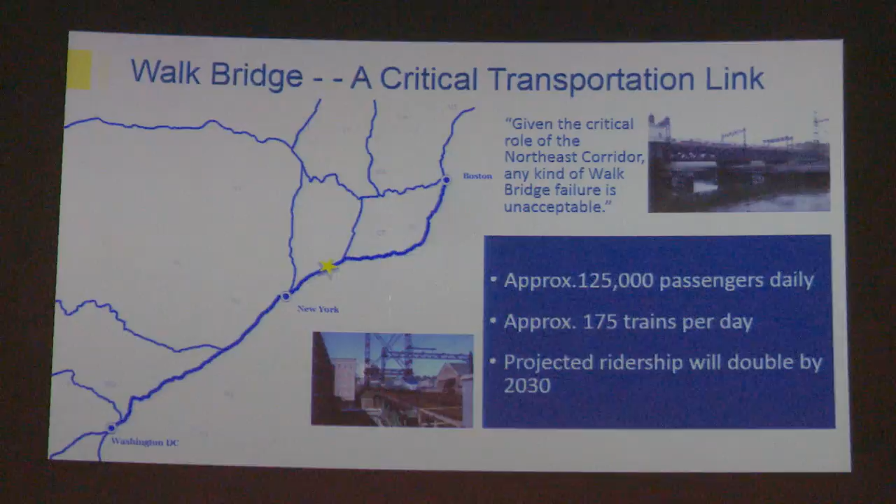So one thing we have to come across here for the project that we work with when we set up a project is purpose and need. People ask, what is purpose and need? Well, it is the criteria that we use that when we set up a project, it has to be met.

So what we decided on this job, in consultation with FTA, is that we're going to have a resilient bridge. We're going to replace the existing deteriorated bridge with a resilient structure. It has to be a safe and reliable structure, and we want a redundant structure.

So what do I mean by redundancy? What I mean is that it'll be a structure that has basically two separate structures, so one moves up and down independently of the other. Currently, right now, the existing swing bridge is a single swing - you lose all four tracks. So by redundancy, we'll be able to still move trains if we have an issue with one of the structures, and you can still move trains.

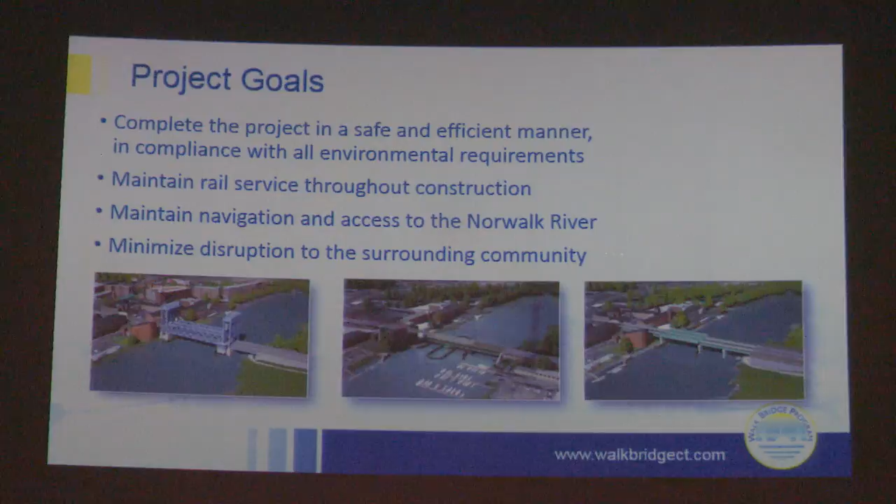Project goals. As we go through a project, you need to maintain project goals. We have a listing here: we want to build the project in a safe and efficient manner, in compliance with all environmental requirements set by the feds and the state. We want to continue rail service throughout construction, safe and maintainable. We want to maintain navigation and access to the river at all times. And we want to minimize disruption to the community, local streets, and businesses around the area.

Over the last two years, we put a lot of time into planning and engineering this project. I'll go through this briefly. We started with a conceptual engineering report back in mid-2014 into 2015. Then we did an operational analysis of the railroad to make sure we could keep trains and people moving along the line. We looked at a fixed bridge evaluation, then a raised grade evaluation if we were to raise the existing grade of the structure, and also a rehab of the structure. We looked at constructability evaluations, examining all the different aspects of construction on the community and the users.

We had an addendum to the conceptual engineering report, and then we finished up with our environmental documentation, which is ongoing—the current EA. We're going to have a comment period that goes out until December the 9th.

At this time, I'm going to turn the meeting over to Chris Brown, who's with HNTB, project manager, and he's going to explain more on what we looked at. Thanks, John.

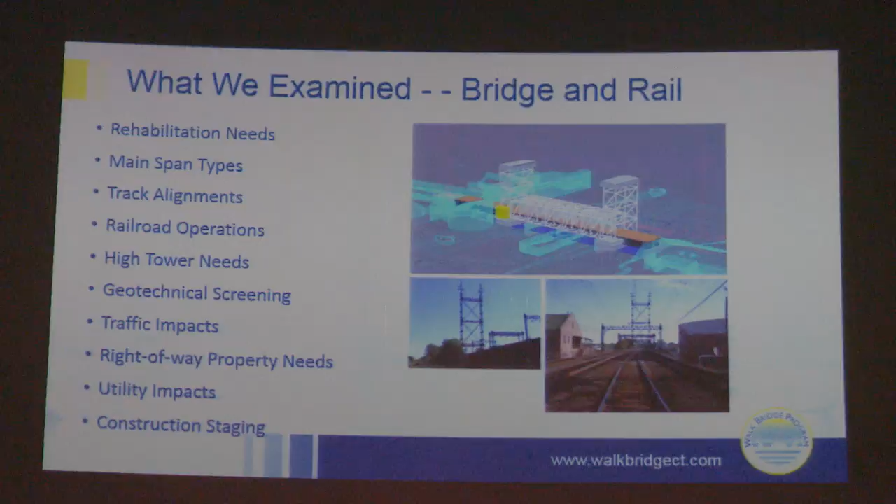So what we did was we first took a look at, well, we didn't want to take a look at any new alignments, right? Because that was really not feasible in our mind, was to build a new bridge, whether it be fixed or movable, on an alignment that was different from where the existing walk bridge was. So we were really confined to those areas of the existing bridge.

And that process was carried out with the other alternatives as well. So that span length was dictated going from A to D. And again, we're trying to miss, to the greatest extent possible, where those existing foundations were. We did evaluate alternatives where there was an existing foundation. It could be done. It's a very cumbersome task to remove entirely that existing substructure unit. These bridges are supported by timber piles that go down about 35 feet into the riverbed.

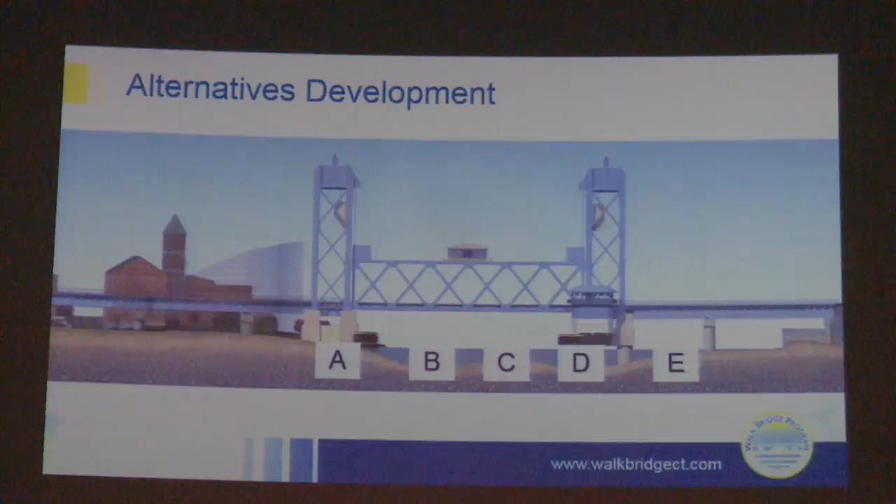And then also, lastly, here's another example again, going from A to D. So here we had a high-level fixed bridge going from A to D, and here we had a vertical lift span, again, same span length, but trying to miss those existing piers. So that was really the driver behind the types of spans that we looked at, the span lengths, and that then feeds into that overall construction sequencing that we talked about.

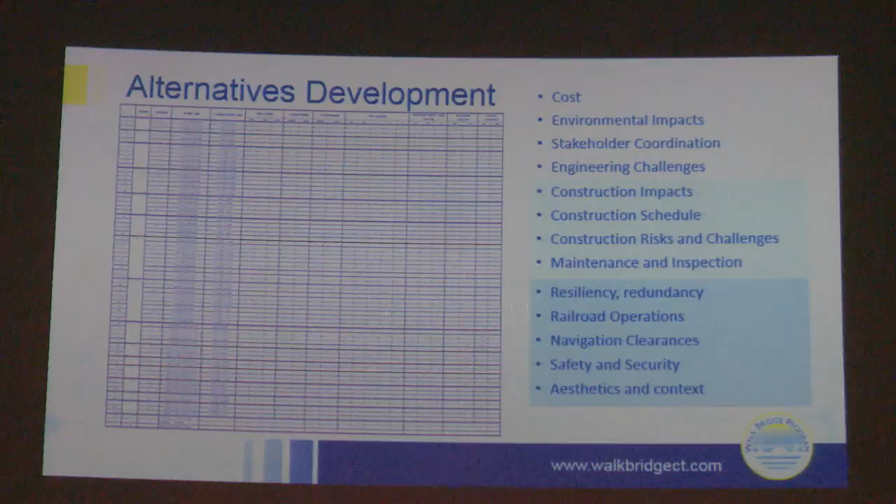And we'll talk about implementation here in a little bit. But all of those alternatives were really evaluated on a range of criteria, from cost to environmental impacts, construction impacts, meaning like what's happening at North Water Street, what's happening to the railroad, what's happening to the waterway users. And then in the end, we want to have that resilient and redundant structure. We want a structure that promotes enhanced railroad operations. We need to know what the navigation clearances are. And then also this is an opportunity perhaps to maybe bring some aesthetic enhancements to South Norwalk as well.

So in the end, some of you may have had an opportunity to review that environmental document and all of the alternatives that are in that environmental document, ranging from the do nothing alternative, which is the no build, ranging from the fixed bridge to the rehab to the movable spans. They're all in that original list of 70. And then as we got into the development further, we actually had subsets of different alternatives, like the fixed bridge had a couple of different subsets.

So all these alternatives, that original list of 70 as we call it, were part of that initial evaluation, and those were the ones that kind of rose to the top as best meeting the project goals, best meeting the purpose and need, and really being those that could feasibly be built.

So speaking of those alternatives, the no-build alternative establishes the baseline, right? We have an existing bridge out there. We understand its performance, its characteristics, its deficiencies, all of that. And then we go into those build alternatives.

Going back to that chart you saw on the previous page, which of course you couldn't read, but it's all in there. Those build alternatives include the rehab and then different replacement alternatives for fixed bridges, different arrangements for movable spans, and out of those assessments came a preferred alternative that we'll talk about here in a minute.

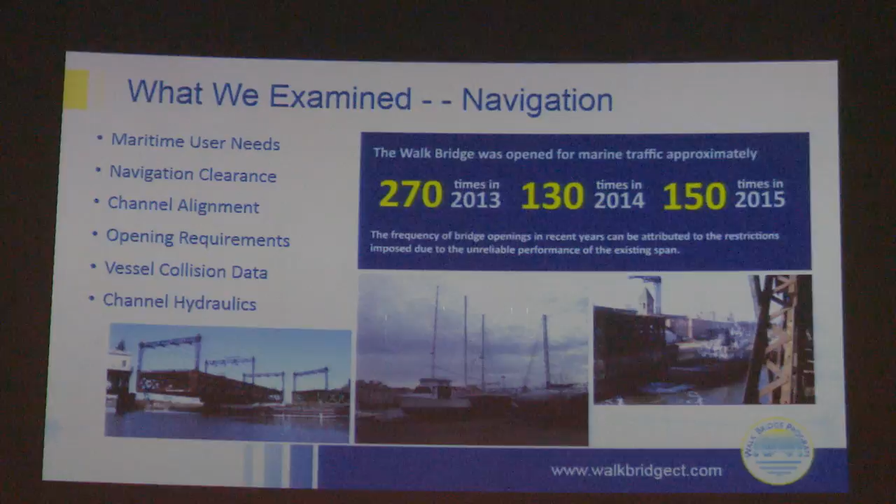A lot of times what we see on these old swing spans—keep in mind, at the turn of the last century, swing spans were the state of the art, okay? Different movable span types didn't really start to surface until you got into the 20th century. And a swing span at the time was great, an efficient structure.

The thing it also has is this big pier protection system that protrudes in and out from the structure itself, which a lot of times actually causes a bit of hindrance to navigation. And when you couple that with a structure in close proximity, it can sometimes make navigation along that waterway a little challenging at times. So we wanted to look at a way to investigate whether there was an opportunity to improve the channel navigation in this area as well.

Also, with barge traffic on the waterway, we needed to understand what type of vessels were out there, what type of tonnage those barges carry, and look at how to protect any substructure, whether the existing substructure or any new substructure, so that the integrity of the bridge remains intact should a vessel collision occur.

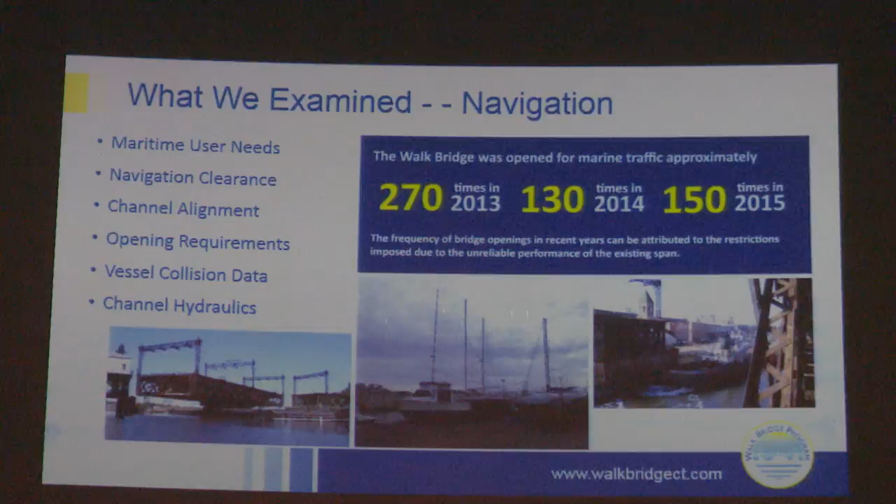And then we also need to understand what's happening with the waterway itself. So we do have an understanding of what's going on out there now because of the hydraulics on the channel. But if we change that configuration of the channel, introduce new piers, open up the channel, or constrict it further, we need to understand what is happening along the waterway. All that's investigated as part of a navigation study and our hydraulic analysis.

There's been a lot of focus, particularly in the environmental document, and rightly so, on the regulatory requirements that have to be met as it relates to the project, but really from an engineering perspective—I'm a bridge engineer, and I like to see these problems solved and figure out how to build these projects. And what it comes down to a lot of times in our decision making is how do you actually implement any improvements here?

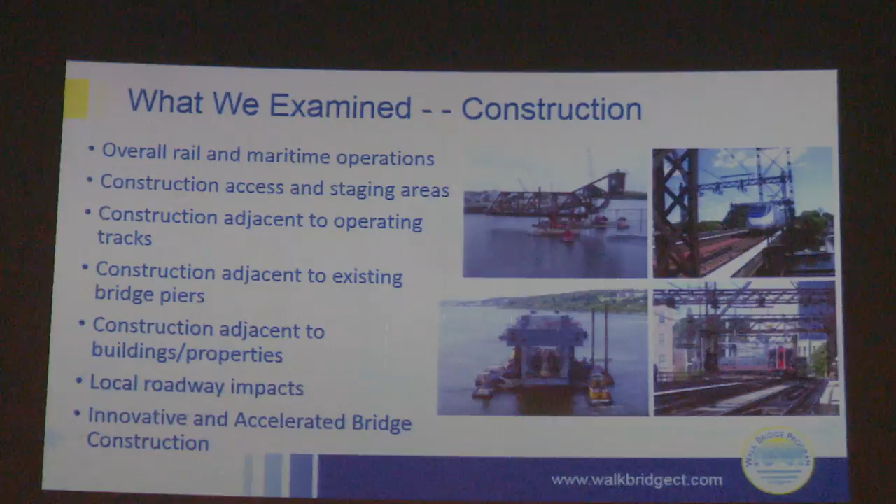Whether you're rehabbing the structure or putting in a new structure, you have to figure out how to keep trains moving, how to keep the waterway open, and how to limit impacts to adjacent properties and other community impacts. One way we do that is by utilizing what we call accelerated bridge techniques, or accelerated bridge construction, ABC. Those ABC techniques are really what's going to drive the schedule on anything done with Walk Bridge, because we understand schedule is a big concern to a lot of you. As John mentioned, we want to complete the improvements at Walk Bridge safely and efficiently, meaning doing it as quickly as we can without compromising or cutting corners. So those ABC techniques are really what's driving a lot of our decisions.

There are a number of construction constraints related to this project. This is probably one of the most congested sites that I've personally been involved with. There are adjacent properties on the west end of the project, and adjacent properties on the east end as well.

There are upwards of 200 trains a day that travel along this corridor, and the passenger trains on the New Haven line are all powered by overhead electrification. That's something that has to be taken into consideration when looking at how efficiently you can perform improvements at Walk Bridge. There are also Metro North and FRA, Federal Railroad Administration, operating rules that not only protect the traveling public and the local public, but also protect what they call the roadway workers—the construction workers who are on site operating equipment, working in close proximity to the existing tracks.

So all of those things come into play in terms of how efficiently and how quickly any of these improvements can be implemented. All of those constraints affect the safety, the risk, the cost, and the schedule of any improvements. Really, each of these alternatives is unique in that they all address those constraints in their own particular way. Some address those constraints better than others, and we'll talk about that.

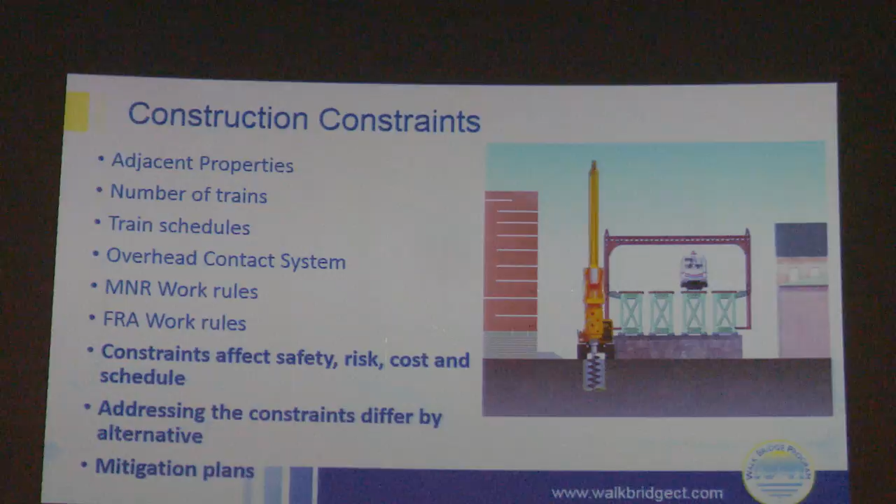For example, we've experienced this when taking geotechnical borings. We'll get a track at 1 a.m.—that's at least the time we're told we'll get the track. But because of train schedules and other constraints on the railroad, we may not be able to start our work until 2:30 in the morning, and then we have to get off the tracks by 4:30. So that work window, the time you have to do any operation close to your operating tracks, gets shrunk from, say, 8 hours to 2 hours. If you had an 8-hour operation planned and you're only down to 2 hours, that operation now takes 4 times longer. That's what we talk about as schedule risk and cost risk when working really close to the railroad.

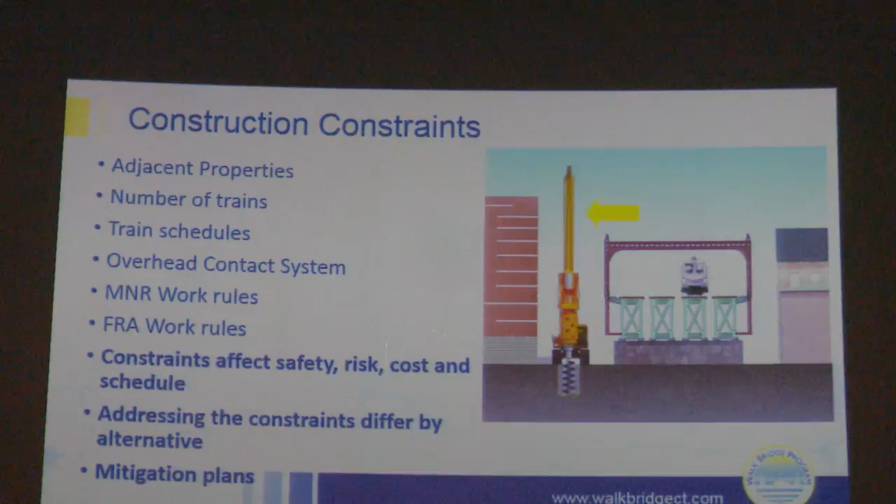Just moving away from the railroad, even 15 or 25 more feet, you can work almost free and clear—you're not bound by those FRA or Metro North rules, so that efficiency kicks up. When you look at some of these alternatives, for example some of the fixed bridge alternatives versus others that get further away from the operating railroad, that drives and improves the schedule. So that, again, is driving a lot of our decisions on the layouts and configurations of the different alternatives.

We talked about property needs that are needed in order to implement these improvements at Walk Bridge. It comes down to access. You have to be able to access the work that you're doing, and ideally, you can access that work where the activity is actually being performed. So if there's retaining wall work, you want to be able to get right up next to where you're working on the retaining walls. Obviously, work over the waterway will be done by a floating platform.

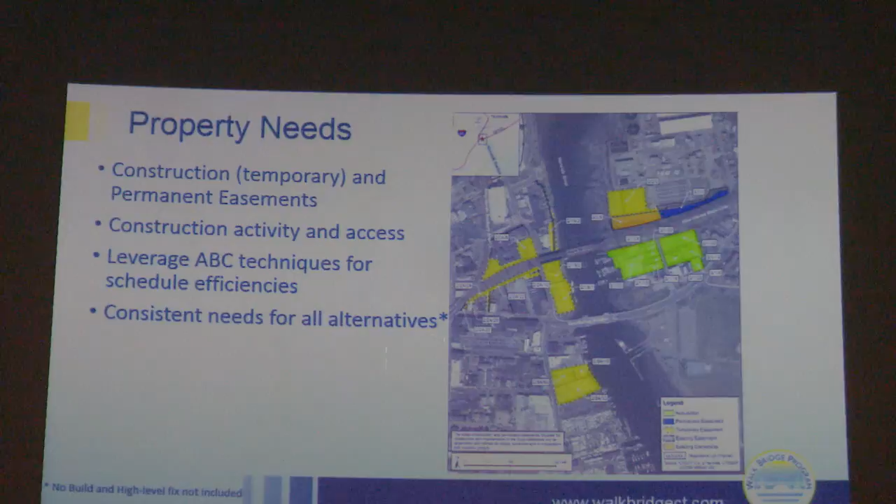Also, some of these property needs as part of the project are really there to leverage those ABC, accelerated bridge construction, techniques. We want to be able to pre-assemble as many things as possible close by to the bridge so that when it comes time to install those elements, they can be done in a swift and efficient manner, again compressing the schedule. So a lot of those property needs are there in order to leverage those ABC techniques.

The important thing to remember here is that whether it's an access constraint or a desire to implement ABC techniques, all of the property needs, rehab, fixed bridge, movable bridge, with the exception of the high-level fixed bridge, are consistent. Now, some of the property may be a little bit more congested during construction than others, just because of volume of materials, steel and concrete and reinforcing steel and all of that. But all of the property that's shown, you don't get a break, whether you're going with a low-level fixed bridge or a rolling bascule bridge.

The project limits between the movable and the fixed bridges, just like the actual temporary and permanent construction property needs, those project limits are the same, nearly the same, for all the alternatives as well. And I have to caveat this again: all of the needs from the project limits and the property needs are consistent for all the alternatives, with the exception of the no build, because if you don't build anything you don't need anything, or the high-level fixed bridge, which is in a completely different category in and of itself. But when you look at the other two fixed bridges and the movable spans, the project limits are nearly the same, as well as the rehab.

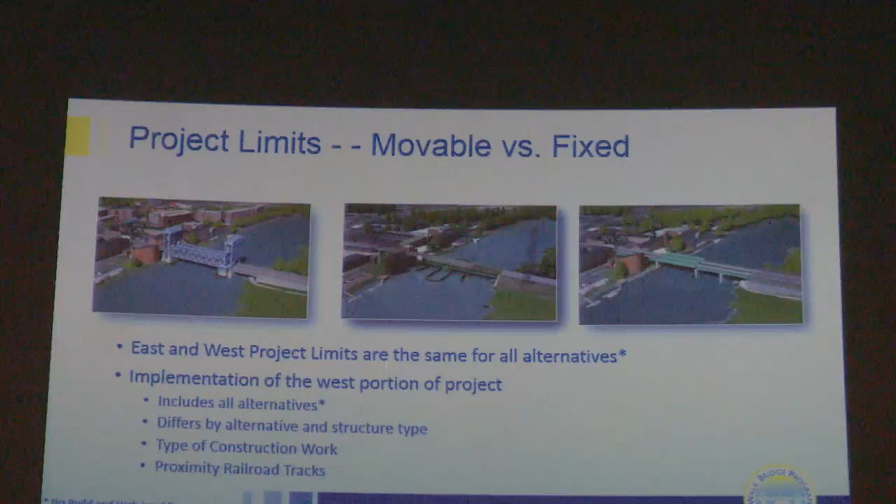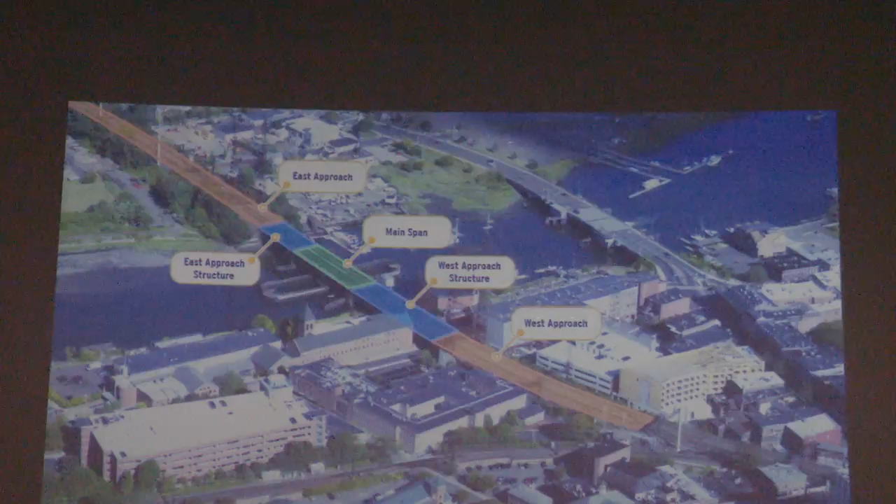So again, looking at an aerial here, some of you may have seen this before, but we've compartmentalized the project where we have work done on the east approaches, the east structure, the main span, the west approach structure, and then the west approach. For all the alternatives, we're doing work in all of those areas. If we're rehabbing the project, we're rehabbing the high towers on the east side. If we're replacing the bridge, we're still going to be doing work over North Water Street and on those west retaining walls. So again, there's really no difference in those alternatives on the west approach in particular and on the west approach structure. It's all a matter of how do you address it, how do you limit the impacts, and how do you implement those necessary improvements.

So let's talk a little bit about some regulatory aspects.

As it is right now, the Norwalk River is a navigable waterway, and the Coast Guard is involved. Some of you may ask, well, why is the Coast Guard involved? The Coast Guard, as part of Homeland Security, does many wonderful things - marine safety, law enforcement, and navigation. What they also do is administer bridges.

So bridges that cross a navigable waterway are administered by the Coast Guard. In terms of that bridge administration, they have to approve the locations and plans for any bridge that crosses a navigable waterway. There's a Coast Guard regulation on the existing span. They also regulate drawbridge operations, and their goal is to balance land and marine transportation needs.

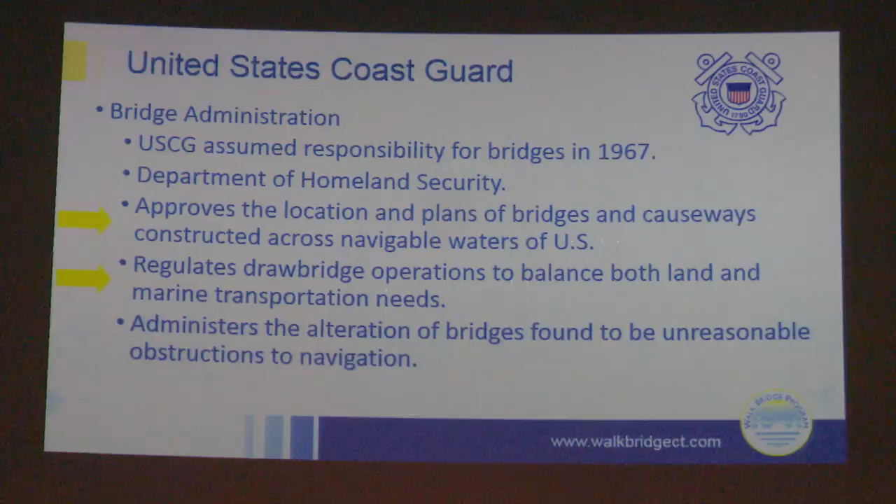One added thing that they do is tell an owner that if you have a bridge that unreasonably obstructs navigation, you have to remove it. Now, the good thing about that - that's part of the Truman-Hobbs Act - is that the Coast Guard will actually pay the owner to replace it, or a portion of it. But that's kind of how they view bridges - the Coast Guard views bridges as obstructions.

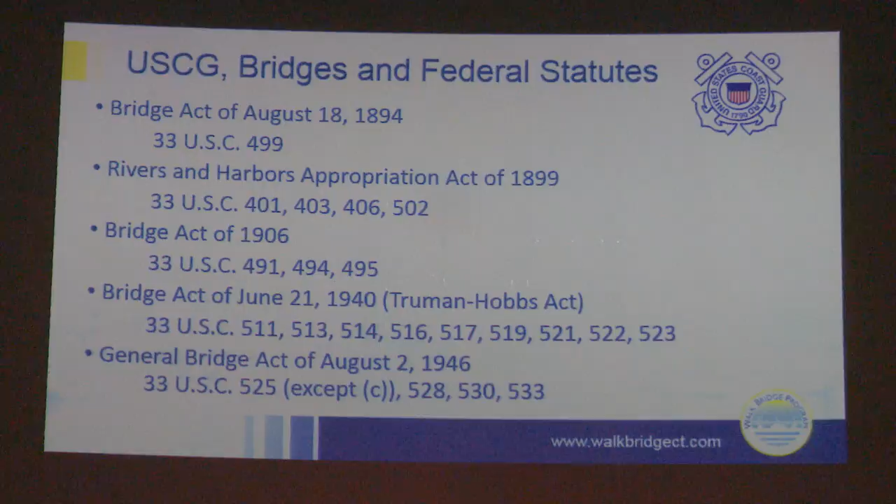I'm not going to get into all these federal regulations and statutes. I'm an engineer, and I've applied these in practice, but I'm not an attorney. There are a number of federal laws and regulations that the Coast Guard abides by in their operations.

So let's look at the Coast Guard mission statement. Really what they're aimed at as part of that bridge administration is to protect the freedom of navigation and the quality of the environment, and to ensure a balanced approach to land and marine transportation systems. They get it - they understand that we've got a roadway or a railroad that needs to get across a waterway, but we also may have vessels that use that waterway as well.

So how can we strike a balance between providing that surface transportation, in this case rail, and the waterway users? One way is to establish those navigation clearances. The Coast Guard does view bridges as obstructions to navigation, and they're permitted only as long as they serve the needs of land transportation while allowing for the reasonable needs of navigation. That's really the key here - the reasonable needs of navigation. There's no federal mandate that says you have to provide unlimited navigation.

If there weren't any overhead power lines right at Walk Bridge right now, that swing span, by how it operates, provides unlimited vertical clearance. So if you had a 203-foot tall vessel coming through here, they would only be bound by those overhead power lines. So it's not an absolute, but it's the reasonable needs of navigation.

What kind of navigation is out there today? What navigation has been out there in the past, may come back, or what type of navigation is going to be out there in the future? That's what they look at.

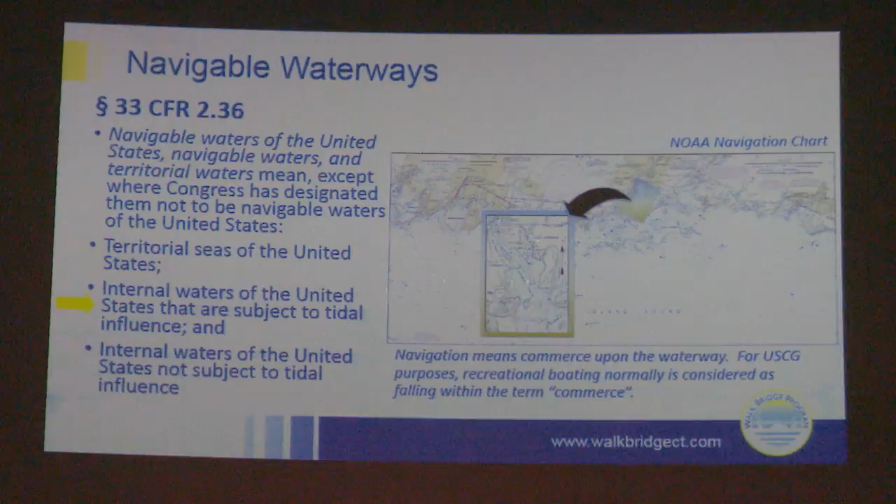So in looking at the definition of a navigable waterway at Walk Bridge itself, in the definition from the Code of Federal Regulations - that's what CFR is - they are internal waters of the U.S. that are subject to tidal influence. So that's what we have at the Norwalk River, and it's designated as a navigable waterway. The image over on the right is just a snapshot of the NOAA navigation chart that has the Norwalk River listed and lists the bridge clearances and everything like that.

So paramount to our alternatives development is to understand what navigation clearances are needed and what those reasonable needs of navigation are, so that when presented to the Coast Guard, they can make an educated decision. Now, that being said, they already kind of have an educated foundation of the type of navigation on the Norwalk River, the type of operation that the existing span has experienced as of late. So they already have an understanding.

But as part of our process, what we do is communicate with waterway users. We understand what type of vessels they have, what type of frequency they have, in order to establish what those reasonable navigation clearances are.

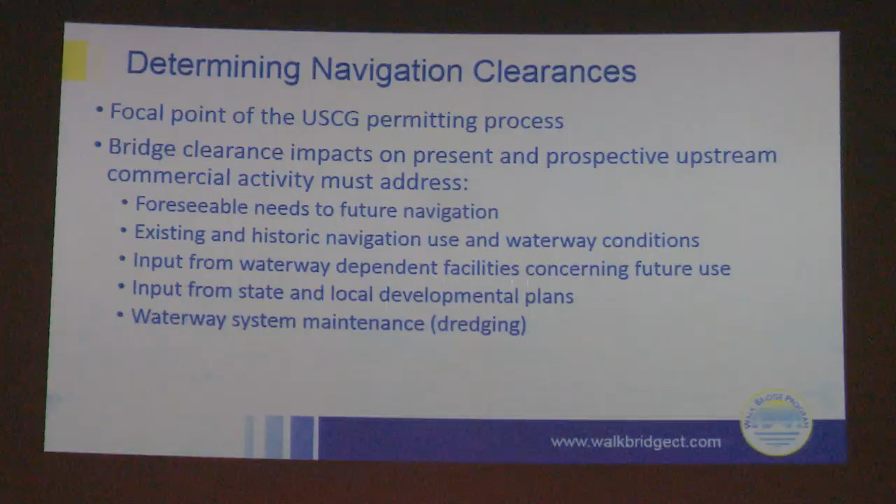So we're looking at what future navigation could be out there, that historic and existing navigation, talking to the waterway users, looking at what's going on as part of a federal navigation project, i.e. dredging, things of that nature.

So in answering some of the questions that do get asked by the Coast Guard of a bridge, when we go to submit a Coast Guard bridge permit application - by the way, we're kind of early on in this whole environmental process, we're just in the EIE phase. There's a whole permitting phase that happens after the fact. And the last permit that gets approved is the Coast Guard bridge permit, when you're looking to build a structure over a navigable waterway.

So we're going to have a lot of dialogue with a lot of different agencies - Fish and Wildlife, Connecticut DEP, Army Corps, etc. But at the end of the day, it's the Coast Guard that, before any shovel can go into the ground, has to issue a Coast Guard bridge permit.

So they want to know how that bridge is going to obstruct or not obstruct those reasonable needs of navigation. Does it impact present or potential commercial navigation? Does it impact dredging? Does it match the navigation clearances that may be on that waterway right now? The Coast Guard doesn't care about the overhead lines - I mean, they care about it, but the overhead lines get permitted separately, so there's a lot of clearance there now. They're focused on what piece of that bridge is going to be an obstruction potentially.

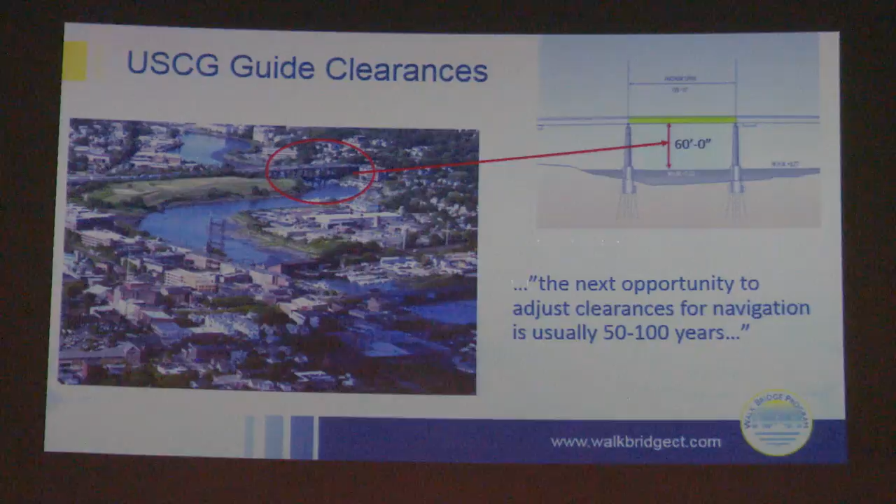So those are the federal requirements as it relates to a navigable waterway, but there's also state and local requirements that have to be met, particularly the Connecticut DEP and the Office of Long Island Sound Programs, in looking at the Connecticut Coastal Management Act. Our friends from the Norwalk Harbor Management Commission also have goals and plans for the waterway itself. So all of those federal requirements do kind of trickle down to the state and local level as well, all speaking to what type of navigation is needed, what type of navigation clearance that bridge has to accommodate. Can an existing movable span be converted to a fixed bridge, whether it be the existing structure or with the new structure?

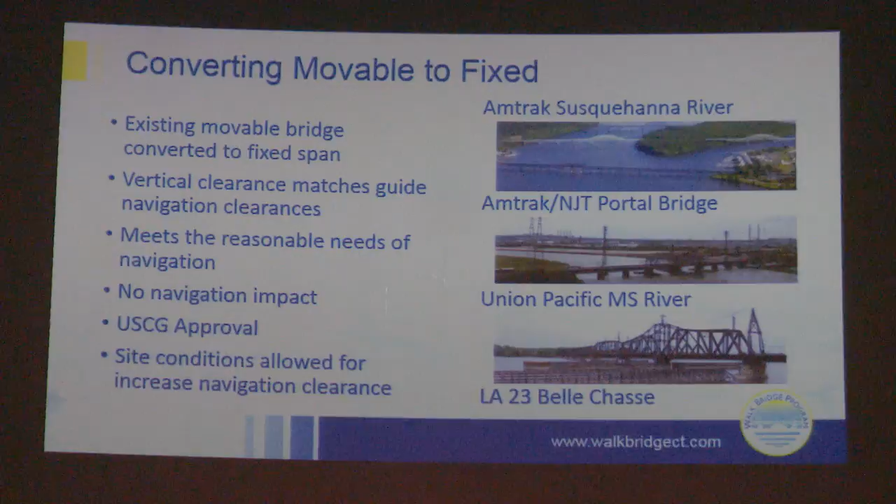That's down in southern Louisiana, that was impacted by a hurricane, but that was a movable span that was replaced or is scheduled to be replaced with a high-level fixed bridge. So it does happen, but at the root of this is that the navigation clearances presently accommodated by the existing span are met by that higher level fixed bridge.

So let's get into the alternatives here, again looking at the no-build and the build alternatives, and then we'll talk about the preferred alternative.

Since we have an existing swing span there, one departure from what we would typically do on a project like this is that we introduced two other types of fixed bridge alternatives into the discussion. We did that because we heard questions from all of you on why don't we do a low-level fixed bridge, or why don't we try to raise the grade of the existing tracks a little bit and still try to accommodate those waterway users. That we've done in the case of an existing movable bridge, and we'll talk about that here in a second.

But the low-level fixed bridge is a bit of a departure from what you'd typically see, where you have a navigable waterway that's active with recreation and commerce, and you put in a low-level fixed bridge. But we did that as part of our fixed bridge study, to address some of the questions the public did have.

So when you stack all those alternatives up against one another and look at the different project needs that were listed, whether it relates to reliability and resiliency, all the way down to sustainability, you'll see a lot of checks, which is good, and you'll see a lot of X's, which indicates that that particular need is not met by that alternative.

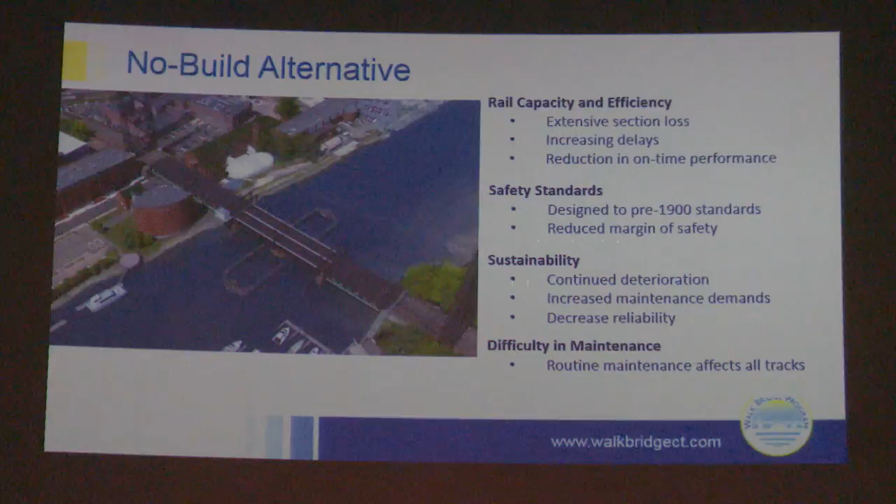So in looking at those deficiencies, we had to study those areas of deficiency and identify areas of improvement, whether it be strengthening different members or replacing different members, kind of breathing new life into that existing structure.

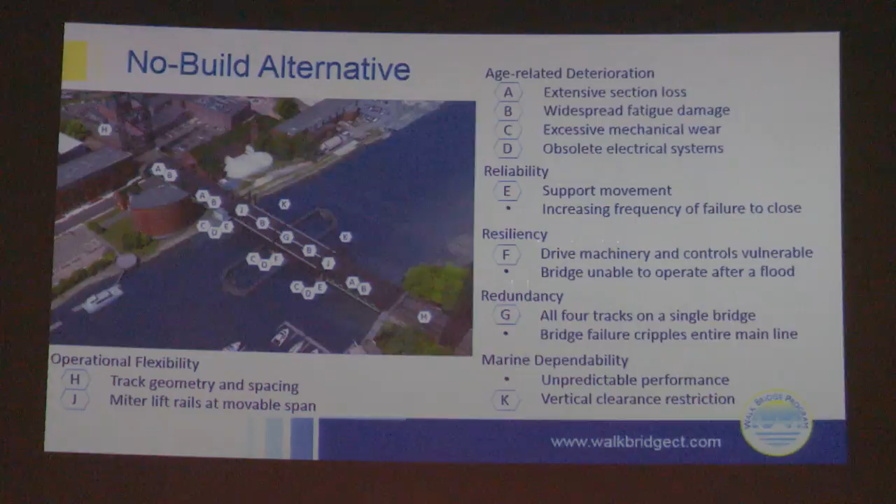So that's the no-build: if we just walked away from the bridge and said, all right, there it is, we'll deal with all those deficiencies and make maintenance repairs along the way. The rehab alternative is that no-build alternative morphing into something more, where we actually take those areas of deficiency and make improvements.

The thing to keep in mind on the rehab alternative is that, for all intents and purposes, you don't have a choice but to work in close proximity to the operating railroad. Because of the type of work that has to be done, your work windows shrink, and when you shrink your work window, you prolong the construction schedule. There's just no way around it.

In order to keep 150 trains going a day, you're going to be working in between trains, working at night, and that really draws out the schedule. And when you draw out the schedule, it draws out the cost of the project.

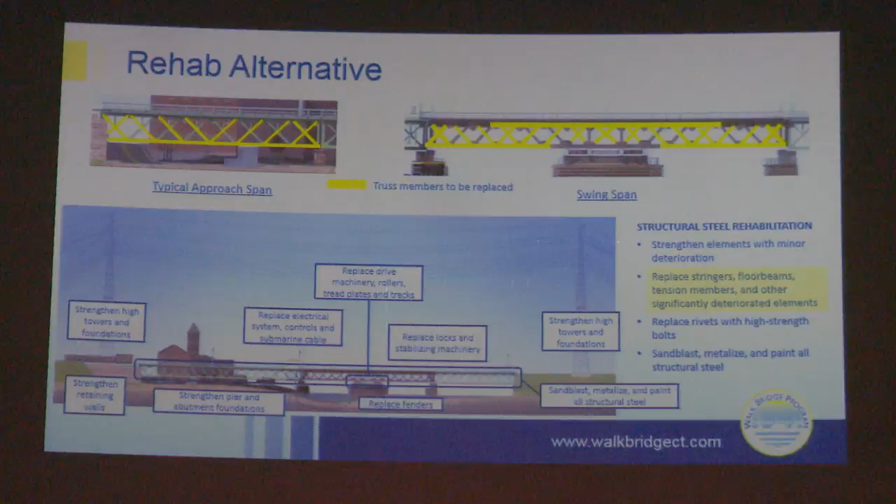Let's talk about redundancy and resiliency. Redundancy is really operational redundancy. The engineers back in the 1890s were pretty clever—they came up with this unique swing span, putting all 4 tracks on the same swing span, and everybody said, yes, engineering marvel. Well, 120 years later, when it comes time to address what's going on with that span, that's actually probably the biggest constraint we have on the project: the fact that that truss carries all 4 tracks.

It doesn't offer the redundancy we're looking for, so when maintenance has to happen—think about it like your car—whether it's a movable span or not, bridges need maintenance. They're exposed to the elements, exposed to wear and tear. There has to be routine, periodic maintenance. So we're not getting away from a maintenance-free bridge, but redundancy kicks in when you have to take tracks out of service to do that maintenance, and this structure doesn't have that redundancy to address those needs.

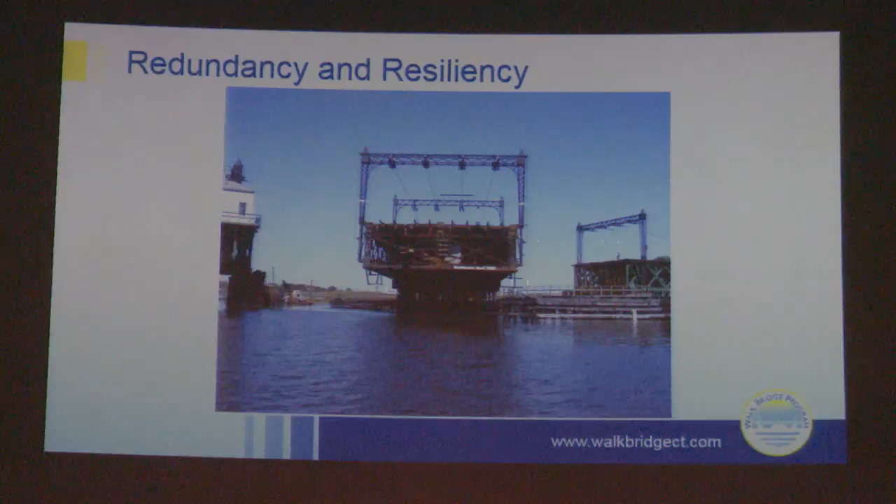So what happens then? Train delays, or a longer construction schedule. Crews are going to be out there longer because your ability to do the work is confined by the train schedule.

Resiliency is the ability to return the bridge to use, either partially or completely, in a relatively short period of time in the aftermath of a compromising event. That can mean nearly anything. It also refers to minimizing the vulnerability of critical elements of the bridge in order to facilitate its return to use.

So resiliency a lot of times comes down to, in this case in particular, storm surge and inundation. If we have an extreme storm event and there's a storm surge or a flood, we want to ensure that any alternative is resilient. There's also fracture and fatigue resistance, vessel collision, and seismic resistance. Overall integrity of the structure leads it to be resilient. So it's not just that inundation aspect of it.

The existing bridge itself has a design flood elevation of elevation 15. So we're kind of right on the cusp of getting those critical operating elements exposed to inundation from the federally mandated flood elevation, which is the 100-year flood plus 3 feet. It doesn't include storm surge, but it does include climate change effects.

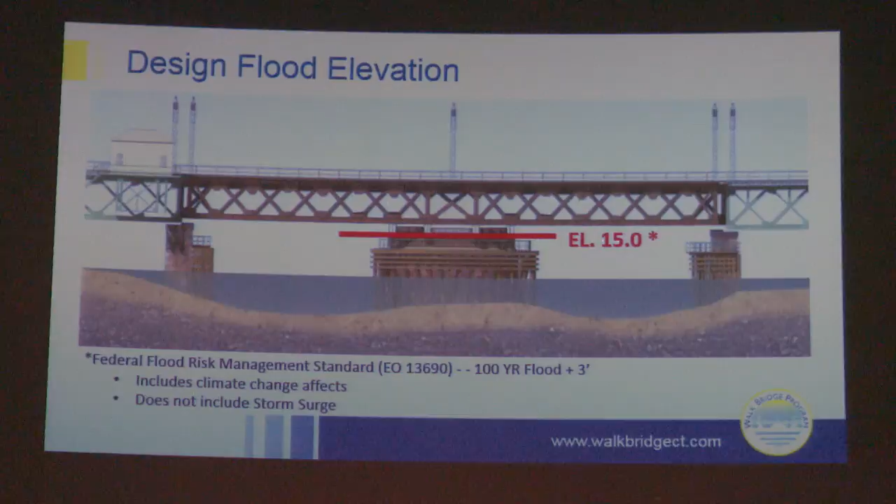When we talk about storm surge, that's if you had a hurricane event—that storm surge then goes up to elevation 24.4. Where does that number come from? Well, the National Oceanic and Atmospheric Administration, NOAA, has storm surge modeling for Long Island Sound already done. So we're able to communicate with them and know what that storm surge elevation is.

So from an inundation standpoint, we want to keep everything above that elevation. Unfortunately, the existing swing span doesn't accommodate that. Those elevations also do not include a parameter for sea level rise, so when you take that into consideration, that elevation has to kick up even higher.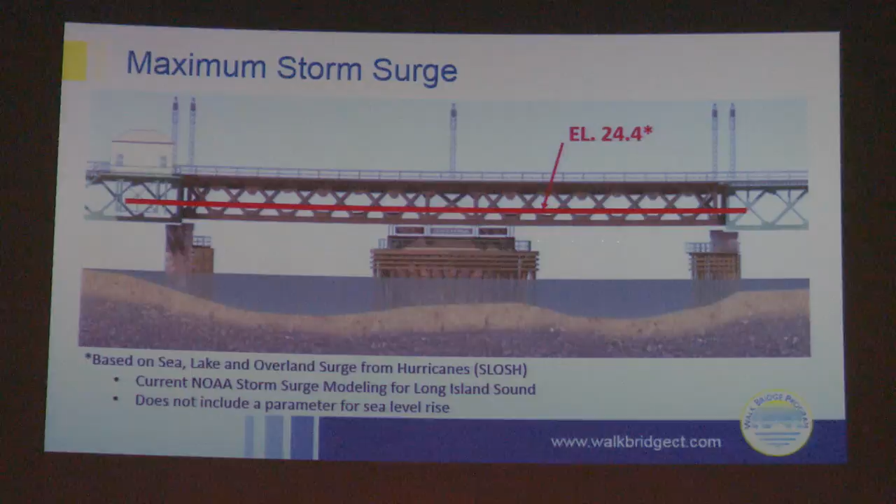So the rehab alternative has an accelerated rate of deterioration. One thing when we get into rehabs—and we do rehab bridges all the time—is that you can count on coming across something you didn't plan for. When we're relying on inspections and existing plan information, there's likely going to be something that doesn't look right or doesn't fit. That's one of those schedule risks we have.

There's the case here where we're going to be repairing stuff that's already been repaired once, maybe twice or more. The extent of the repairs, the high rate of deterioration, and all those repetitive cycles of maintenance really only make it possible to do a full system-wide rehabilitation. I know there's some question about why don't we just lock down the bridge and not make it movable anymore—but doing that doesn't address everything on the bridge that needs to be done. Quite frankly, the movable bridge aspects of this existing swing span make up a small fraction of the total cost of addressing all the needs on the project.

One of the things that's really tricky with an old railroad bridge is that you're mixing old infrastructure with modern needs. We can make improvements, strengthen the foundations, and do all that, but at the end of the day we still have this old bridge, and we're trying to run a modern rail system on top of it. The two don't always mesh well, because back when this bridge was designed, they didn't have catenary, continuously welded rail, and other rail features that we have today. So there's always not a good match when you have an old structure with modern rail systems.

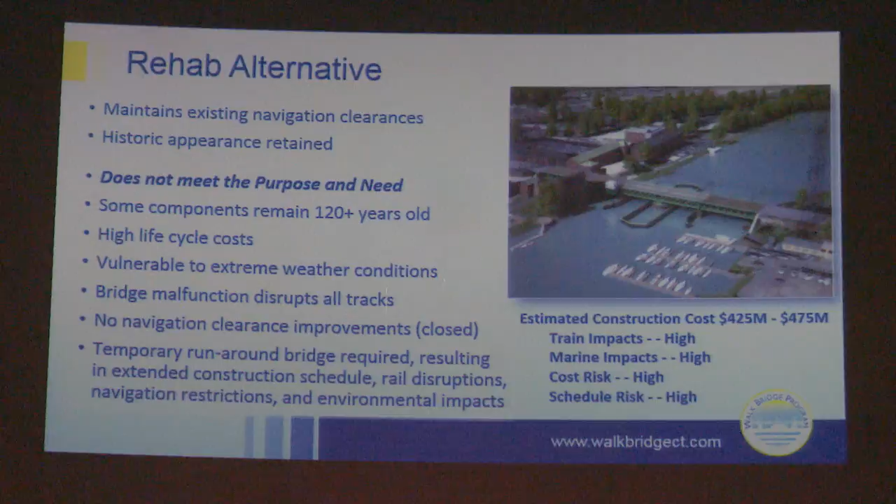So again, with the rehab option, you have a lot of train impacts, marine impacts, cost risk, and schedule risk. We'll talk about the runaround, because one of the ways we're looking at implementing rehabilitation efforts is to implement a runaround. Again, we want to try to get away from the operating tracks as much as we can, and one way to do that would be this runaround.

Now we're going to shift our perspective here and look to the southeast at the existing bridge. The runaround itself is a temporary fixed bridge that would be implemented, and it would peel off on the east side, cross the river, and then get tied into the existing bridge.

Now, that accommodates about 85% of the total bridge length, but because of our constraints based on the adjacent properties, we can't bypass the entire bridge. So we're left with the ability to clear the swing span and the east approaches, but we can't clear the west approaches. We can't clear what's happening at North Water Street. The runaround crosses over North Water Street, and there's actually a lot of prep time that takes place in order to actually implement this temporary bridge.

So we're building a bridge so that we can fix the existing bridge or to build some of the other alternatives. And again, the whole idea is to do it safely, to get away from the operating railroad as much as we can, and to do it in an efficient manner. What it does do is that it places this temporary structure in really close proximity to the aquarium. I mean, I'm talking literally inches away from the aquarium. That's how tight that is.

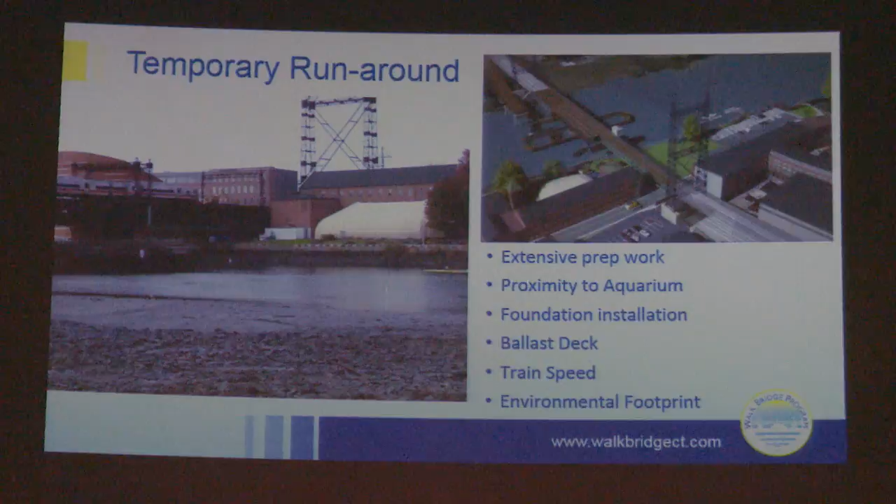The high-level fixed bridge, in looking at the existing swing span above mean high water, there's about 16 feet of clearance there over the waterway when the span's in the closed position. With the high-level fixed bridge, using the guide clearances provided by the Coast Guard for the I-95 bridge, results in a structure at 60 feet clearance. So that meets the reasonable needs of navigation.

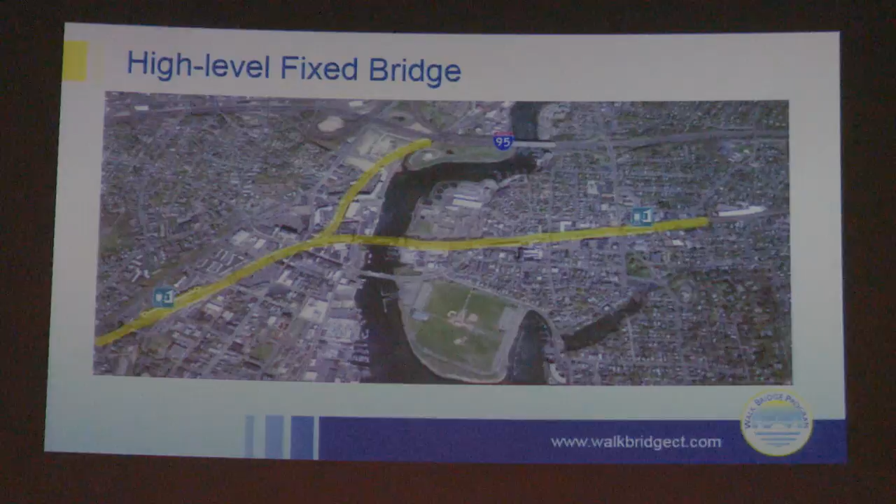That's great. What that also does is that it has dire impacts to the city of Norwalk for this particular alternative. And what I mean by that is that you basically have this large structure now passing right through East Norwalk and through South Norwalk. Those railroad grades are capped at the 1% grade that we see here on the image there. And the limits of the project, this is where we talk about the difference of the limits of the project, go all the way from East Norwalk Station, and because of those railroad grades, we can't get up and down fast enough to hit South Norwalk Station. So it would require a new South Norwalk Station.

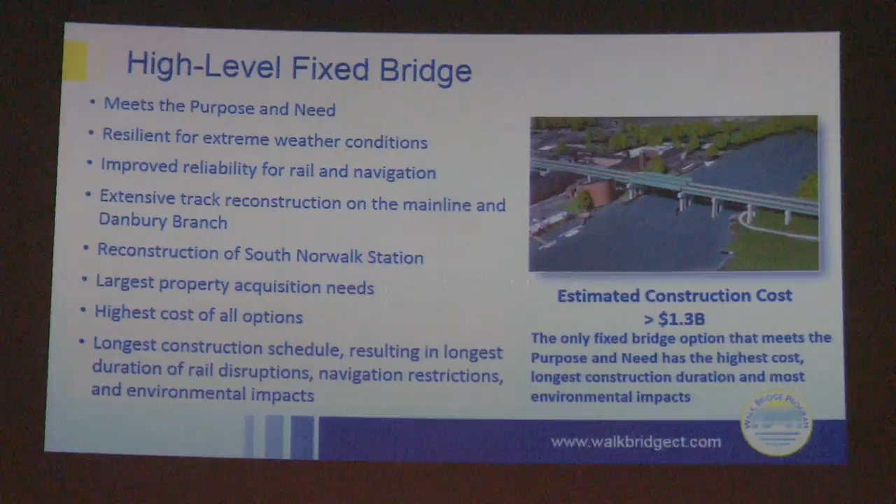It does meet that purpose and need, but it also is the most costly, and it's also the most environmentally impactful of all the alternatives.

So let's go on to those other fixed bridge alternatives. And again, these two alternatives were introduced by virtue of our communications and the comments that we've received from all of you. Why can't we have a low-level fixed bridge? So when you take a look at that low-level fixed bridge, the bridge is flat right now, pretty much across the existing structure, and the bridge is pretty happy without having any grade on the existing bridge itself. And again, it provides 16 feet of vertical clearance when the span is in the closed position.

With a different type of structure and with modern current day construction techniques, we can increase that navigation clearance with a fixed bridge to 20 feet. 20 feet does not meet the reasonable needs of navigation based on current waterway use. It doesn't meet reasonable needs of navigation based on historic and potentially future waterway use as well. But that's the regulatory side of it. Let's talk about the implementation side of it.

This is where, again, working close to the operating tracks, because again, we're building this bridge right in the footprint of the existing bridge, so we have to stage it right. And the way to stage it is potentially to incorporate that runaround structure. Well, if we had a runaround with this bridge, that'd be no big deal, right? Because we're already providing an obstruction with the finished bridge.

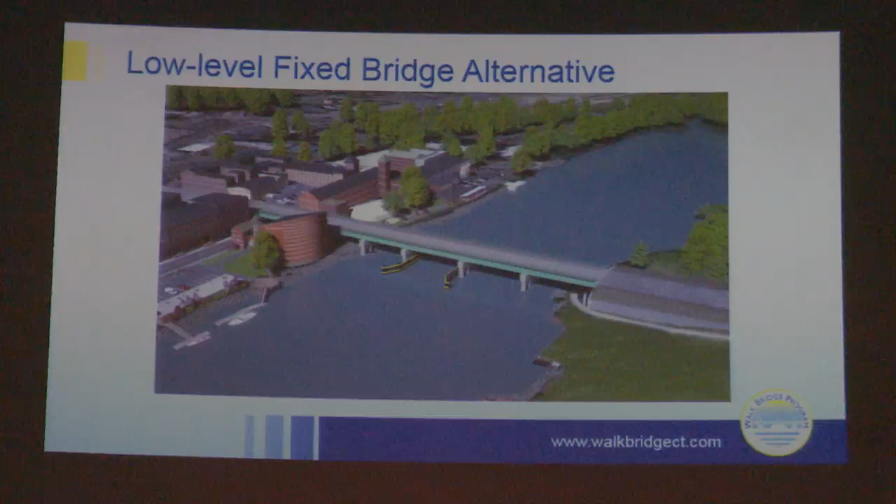So there's no big deal of having an obstruction with a runaround, however there are some constraints that come along with that. If you look at this bridge from a cost perspective, if we had a clean slate and said let's just cross the river without giving any consideration to regulatory requirements, then yeah, that low-level fixed bridge seems to be one of the ways to go. But you have to remember you have a bridge there now, you have to keep those trains going, and you're working in close proximity to the operating railroad, introducing a runaround which increases the environmental footprint over the others.

So with that, you have a resilient structure and improved reliability for rail traffic because of this brand new bridge. It doesn't meet navigation, the reasonable needs of navigation. You do have that temporary runaround structure to try to move construction along more efficiently. Because we're working in close proximity to the tracks, you've got high schedule risk and cost risk, and all the other impacts to the traveling public with the low-level fixed bridge alternative. When we look at costs, one thing to keep in mind is that it doesn't reflect those cost risks, so cost uncertainty is a big thing.

As engineers, when we look at cost, we take a certain amount of concrete, a certain amount of steel, and we know the unit prices of each of those elements, and we develop the cost. But what it doesn't do is account for what happens when we have a work window that shrinks from 8 hours to an hour and a half. What does that do to the cost? That drives up the cost.

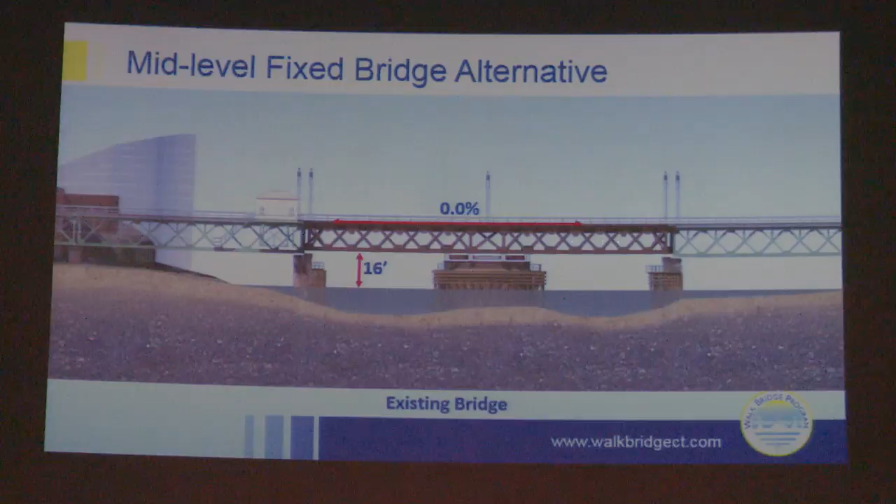So, mid-level fixed bridge then. We're getting pretty close to the end here, folks. The mid-level fixed bridge actually was a byproduct of what we looked at on a movable span option. What we did at Niantic, up the road a ways, on the Niantic River Bridge, was develop a grade raise on the movable span. So there's still a movable span with the new bridge at Niantic, but that was built on an entirely new alignment. We had the real estate to accommodate that, and we could increase the grade at that particular bridge.

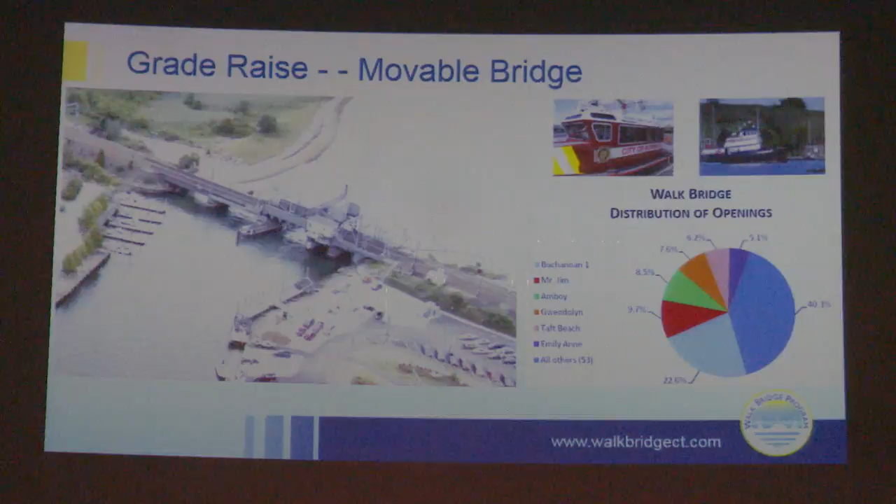But what we did do is take a look at the snapshot of navigation use available to us, and we looked at what happens if we were able to accommodate the barge traffic. By doing that, there may be an opportunity to eliminate a number of the openings on a movable span. That then turned into, well, let's turn that grade raise into the mid-level fixed bridge. So we're going to nominally increase the track elevation upwards so that we can try to increase the bottom chord of the bridge itself, and that distance from waterline to low chord would go up.

So with that, we could have a structure that has upwards of 34 feet of clearance. We're going from 16 feet to 34 feet. But the thing to remember here is that this waterway is subject to tidal influx, and there's a big swing between the water elevations, so there's no guarantee that those commercial vessels could be accommodated. They wouldn't necessarily have free reign on that waterway. So the fixed bridge alternative also has some constraints, just as the other alternatives do that we talked about.

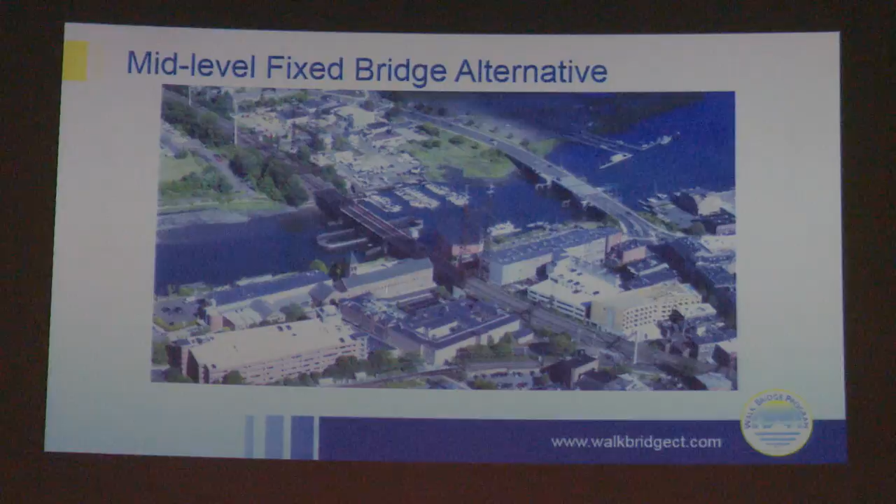But if we take a look at the image here, on the east side of the project we're going to be slowly going up as we approach the waterway, and the same thing on the west side of the project. We're going to increase the grade at 1%, because that's really the maximum we could do. If you stand on the walk bridge and look down towards the west, you can see a maze of overhead catenary and the rail systems and the structure itself, and it's a really complex endeavor to try to improve that track profile.

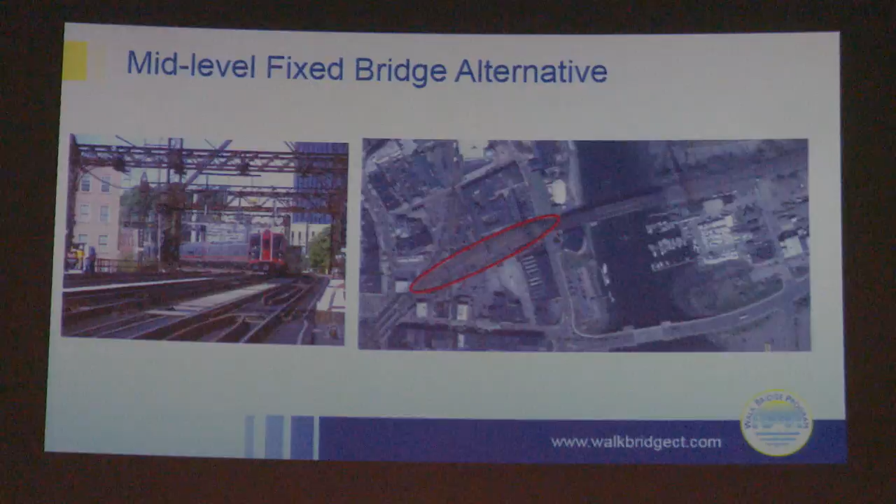The key challenge here is in the area on the west side, where we're really shoehorned in between the Ironworks building and the lock building, and how do you increase that grade raise? So for the mid-level fixed bridge, if you stood in the parking garage at Ironworks and looked at that high tower, you're looking at about a 6-foot increase, and then it tapers down before it gets to the Danbury line.

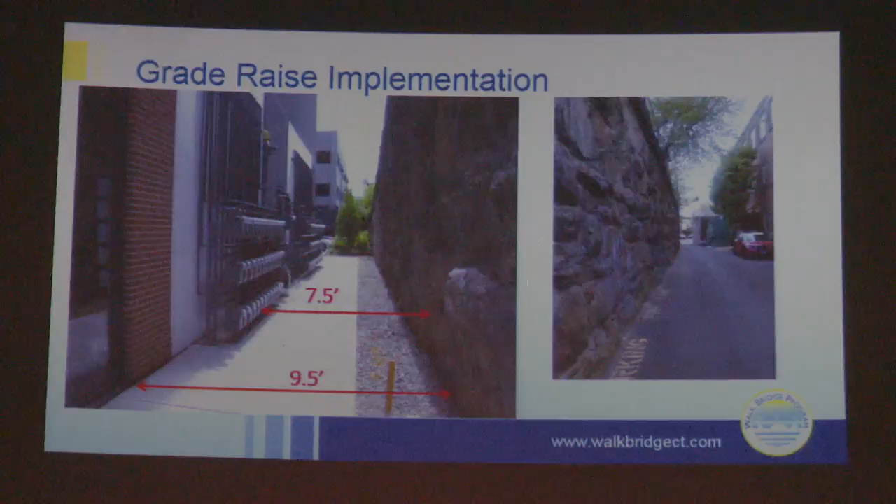Looking down the alleyway between the walls and the ironworks, it's very tight — there's not a lot of room to operate. On the right-hand side of the slide, you see the alleyway between the lock building and the retaining walls. Again, there's really tight confinement in that area.

What we want to do is increase the grade by that 6 feet. At that location, you're going to be 6 feet taller than you are today. It doesn't sound like much — it's a little shorter than I am — but when you're talking about increasing the track profile that much, it's pretty significant, and it represents a lot of challenges.

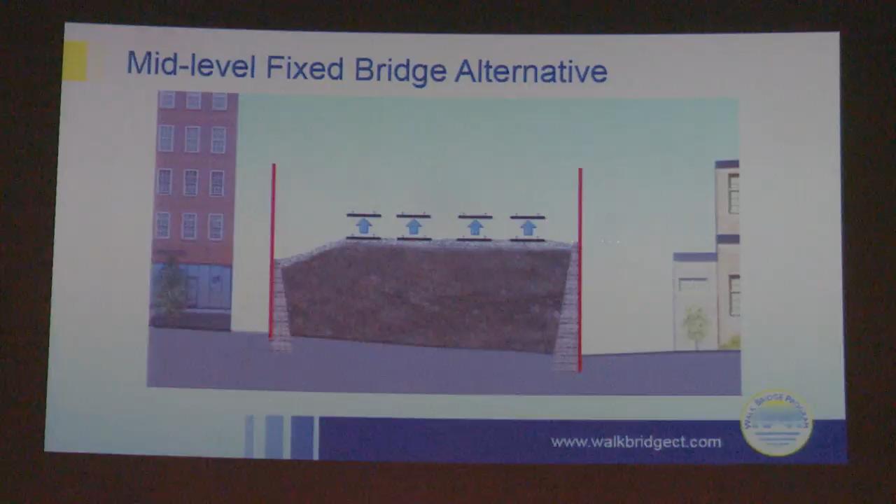We want to keep all of the work within the existing right-of-way — the permanent construction within the existing right-of-way, represented by those red lines. We've looked at and studied this a lot, I can tell you that.

One alternative would be to add more height to the existing walls. But those walls are very challenging — they have a lot of unknown conditions, and adding any new height or load to them would be a challenge. We looked at building a bridge, and even walls within the walls, to try to retain this extra 6 feet we're trying to accommodate.

Really, what ruled this out — in fact we have an entire 30% design of this done — is that it has a fatal flaw. When you get to this condition, imagine you're looking at the 2 tracks on the left; those are under construction right now because we're working to raise that grade 6 feet, while we're operating on the tracks to the right.

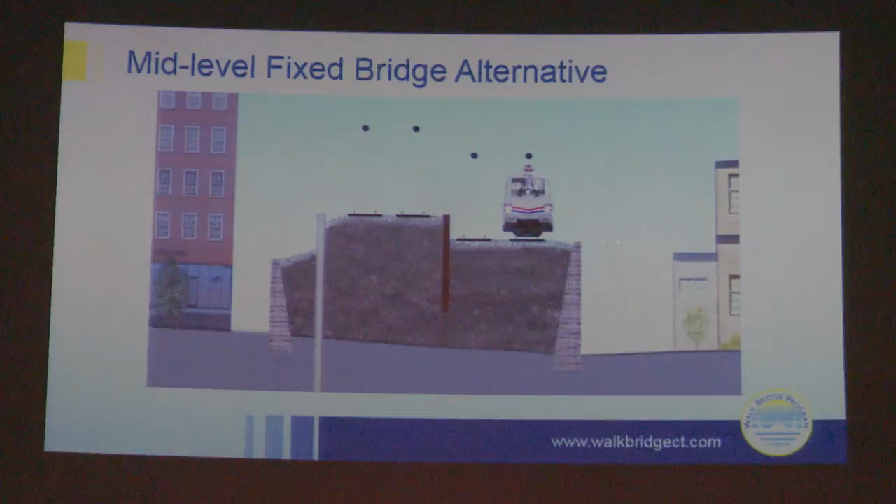At this location, you can only operate 1 track. So like that runaround bridge had 2 tracks and we were trying to get 150 trains a day on 2 tracks, now we're trying to get 150 trains a day on 1 track — a lot of schedule impacts on the commuters with that operation. So really, the mid-level fixed bridge, while attractive in terms of accommodating navigation, its challenges in implementing really kind of ruled it out.

I'm going to skip this slide because it's hard to tell what's going on there. So again, the mid-level fixed bridge where we raise the grade doesn't meet the reasonable needs of navigation because there are vessels that cannot pass beneath 34 feet. We would implement that temporary runaround, and the grade raise on the west approach is really challenging, with a lot of risk associated with cost and schedule because you're doing all that work right at North Water Street to try to raise that grade.

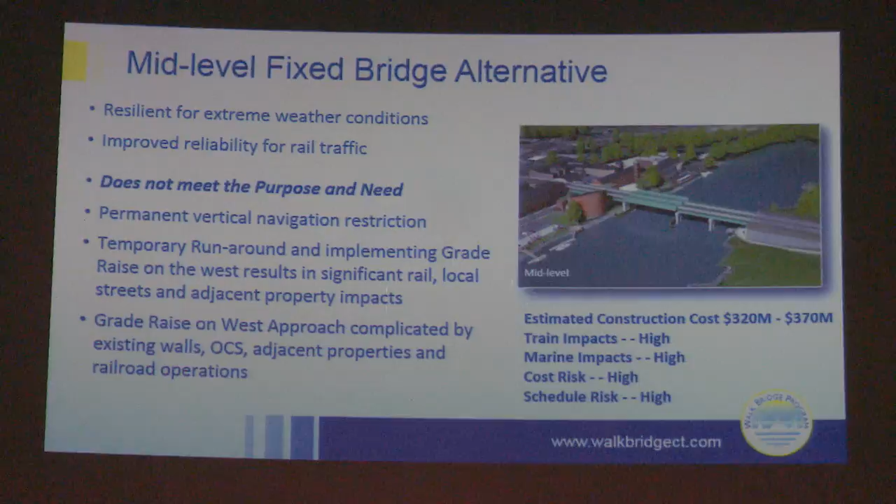So now we move on to the movable bridge alternatives. Of that list of 70 bridges we saw, probably 60 or so of those alternatives were different movable bridge types, whether they be bascule bridges or vertical lift bridges.

The movable bridge alternatives were the lowest cost to satisfy the purpose and need. If you remember, the only other alternative that met the purpose and need by the definition of the project was the high-level fixed bridge, and that was the alternative with the highest cost.

The movable bridge alternative would be resilient to extreme weather conditions because we would place all of the equipment where it wouldn't be subject to inundation. It would be resilient to seismic activity, long-term fatigue, and vessel collision. There's also the fewest foundations in the river itself.

It has the potential for the shortest construction schedule, and the shortest duration of when we'd have to go down to 2 tracks, which is also attractive. We don't have to have the temporary runaround here, because the way we're configuring the structure type and the foundations gives us the ability to get far away from the operating railroad to make construction really efficient.

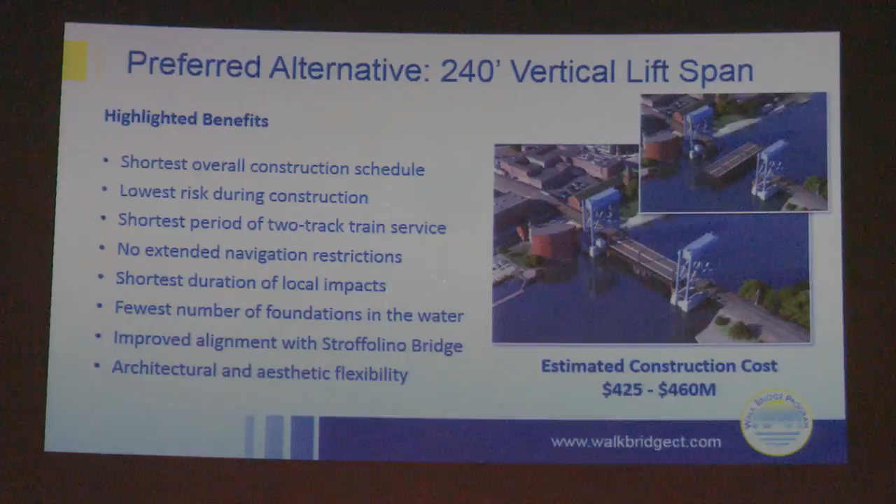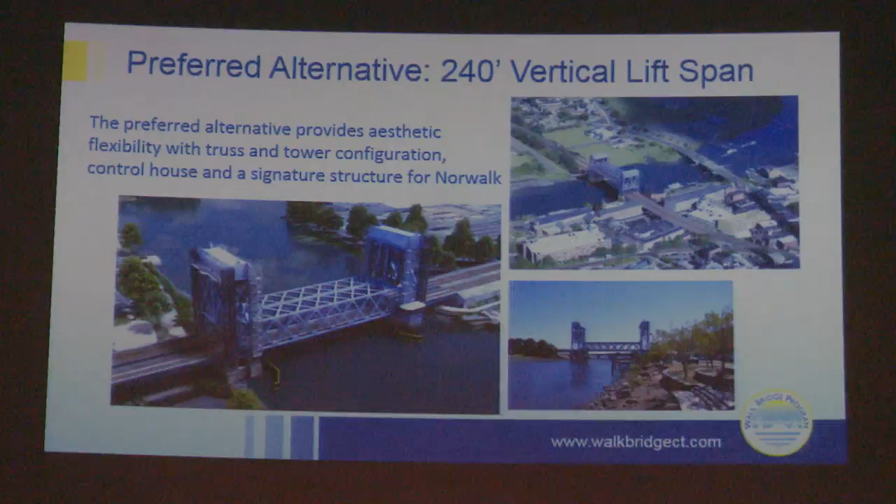We get better alignment with the Stroffolino Bridge. This alternative also offers architectural and aesthetic flexibility - elements of the structure subject to public input, whether lighting, color, or configuration, developing an overall theme for what could be an iconic structure for the city of Norwalk, with the truss, tower configurations, control house, and other features.

We do get questions about how tall the towers are. We're looking at a range, probably on the upper end, closer to 115 feet - about half the height of the high towers. There are vertical elements at either end of the bridge right now, and these high towers could potentially replicate those vertical elements across the landscape.

We also get questions about how much the movable bridge piece costs. If we took just that 240-foot long lift span without the mechanical and electrical systems, the lift span towers, and the counterweight, it's about 10 to 15% of the total cost shown for that alternative - a relatively small portion of the total project cost is made up of the movable bridge features.

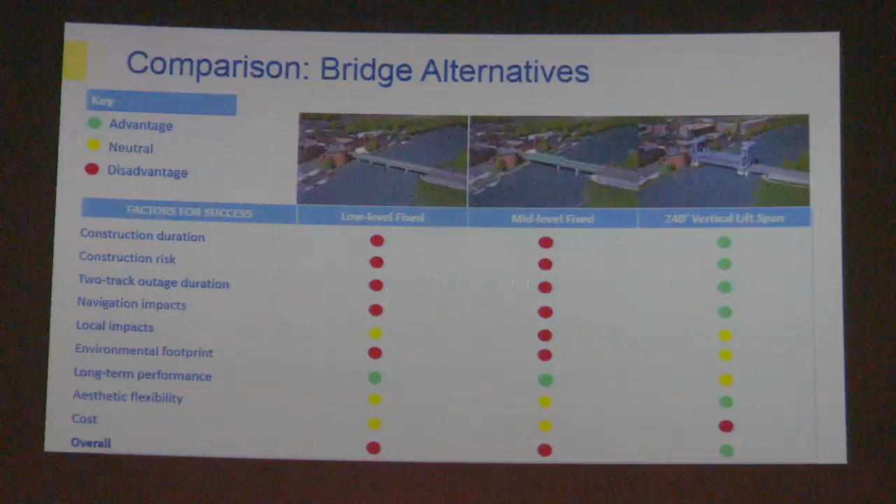So in the end, the temporary and permanent property needs to do any improvement at Walk Bridge are similar for all the alternatives. The project limits are really consistent between the alternatives - you're not going to avoid doing work on the west end or east end with any of them, but it's a matter of how you implement that. It really comes down to construction staging and communicating those impacts that may occur during construction, as well as any impacts on the environment.

So with that, hopefully everybody's still awake.

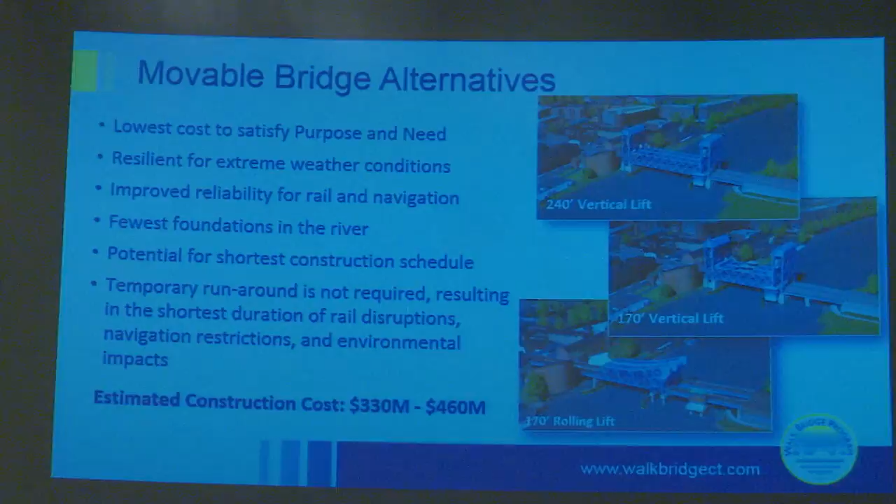Great question. There were two different vertical lift spans that were studied, so let's get back to both of those. The one on top was the 240-foot span, and what that does is put the entire structure, from the foundations to the towers, on either side of the existing swing span. So we're not blocking any of the current channels within the waterway itself.

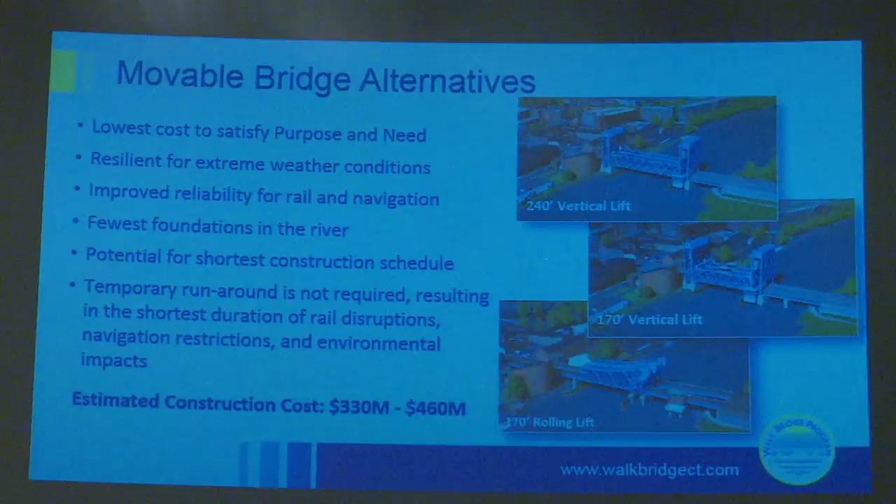The shorter lift span, the 170-foot span, has the western pier in the same location as the other option. With the shorter span, we're building a foundation right in the eastern channel of the existing swing span. Some may say that's okay, and it may be okay, but there are a couple of disadvantages to doing that. One, it does shut off the channel.

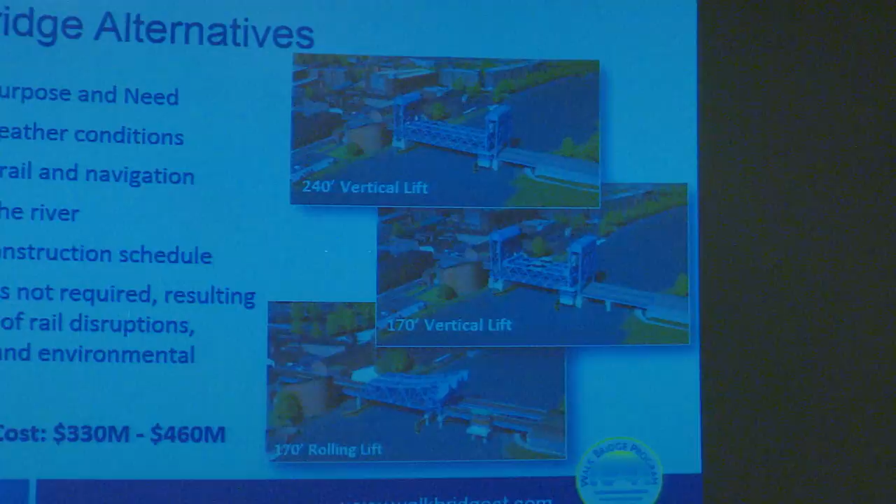It also could potentially impact the temporary channel hydraulics, because now we have this huge obstruction right in the middle of the river. With the 240-foot span, we're further out, so we're not in the peak flow area of the waterway itself.

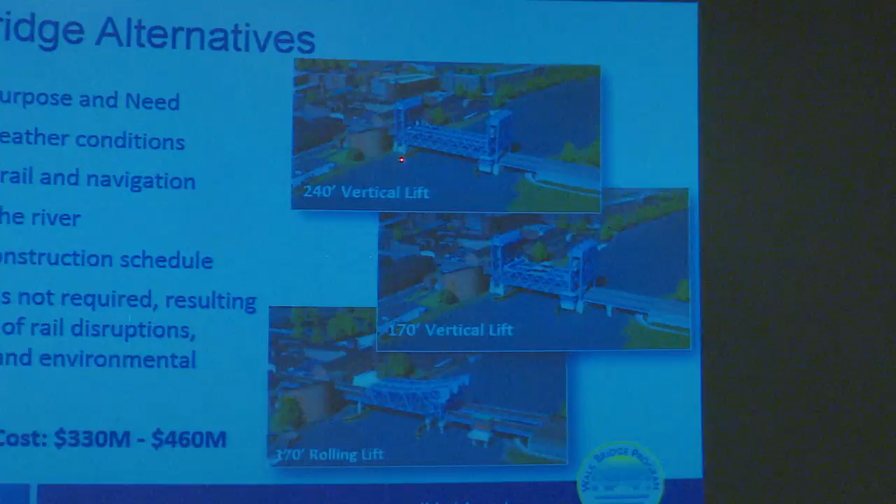The second thing is that in both alternatives for the lift span, this pier is built adjacent to what we call a rest pier. When the swing span closes, the east end and the west end sit on the rest pier. On the long span, we're straddling both of the rest piers. On the shorter span, we're building not only close to a rest pier, but also close to the existing pivot pier. The sensitivity to installing foundations in close proximity to that existing pivot pier, which is the middle pier that the swing span operates on, can be challenging.

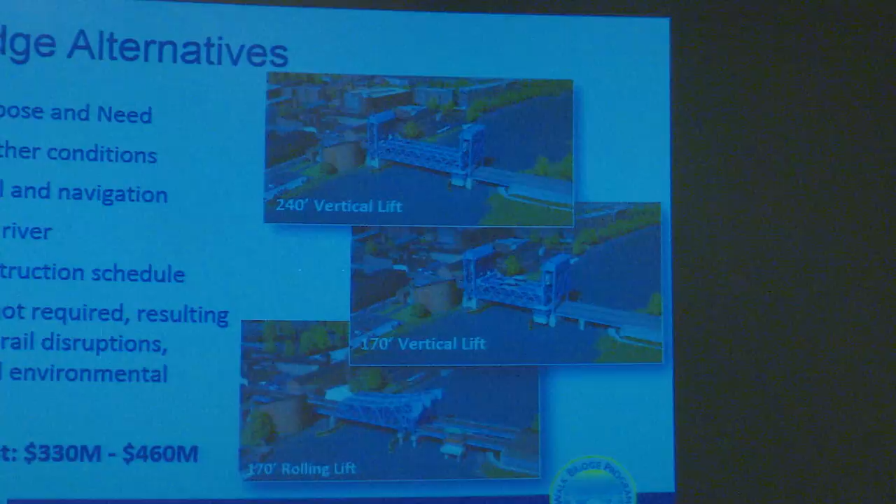So we want to be able to control any construction risk that may be introduced by building in close proximity to that pivot pier. There's a couple of reasons behind it. Other factors come into play when it's time to talk about staging and implementing it step by step. At some point with the shorter span, you either have to cut out part of that swing span to get it in. But with the longer span, as I mentioned, those engineers were clever with that 4-track swing span, but it's a big impediment—with the longer span, you don't even have to touch it.

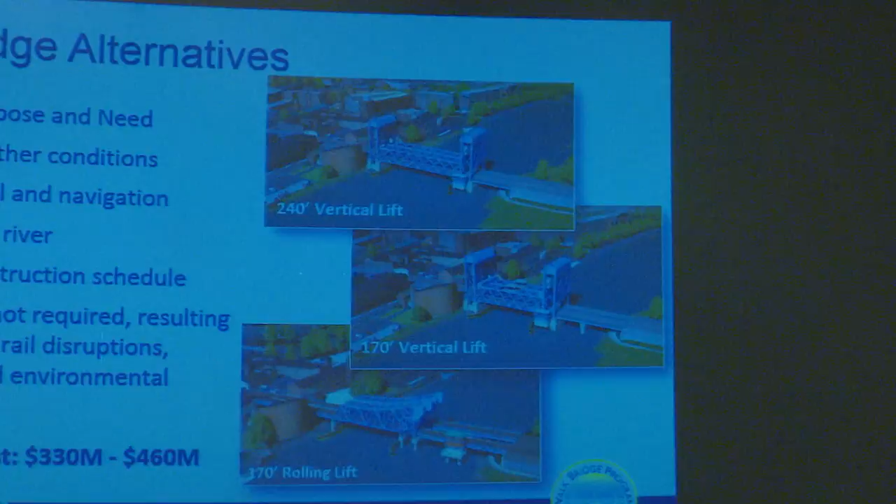One quick further question: what will be the height of clearance under the bridge with the lift span? Presently, based on the guide clearances provided by the Coast Guard in conjunction with the navigation study, because there is a structure across Norwalk River right now with a vertical clearance of 60 feet above mean high water, we're matching that right now.

Does it have to match that in the end? That's the starting point.

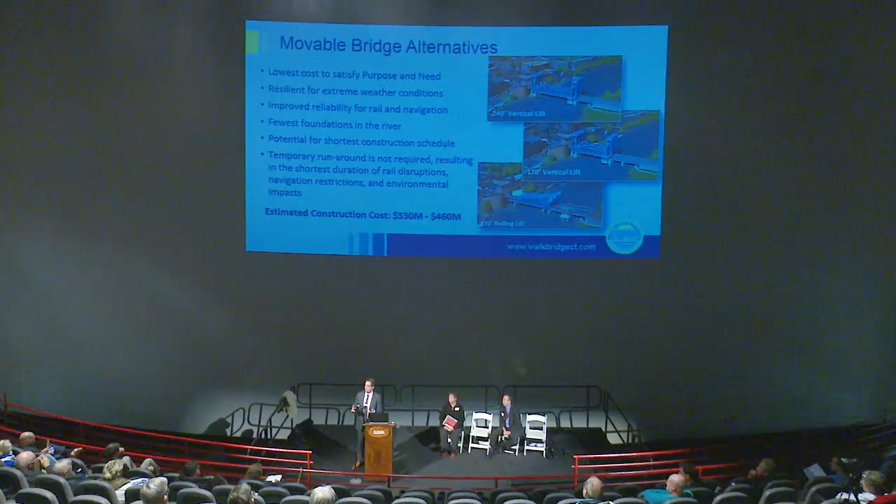What determined that height initially, the I-95 bridge height? That's a great question. I researched that because I wanted to find the Coast Guard bridge permit for that, and I couldn't find it. John, do you have any background on that? No, that's a great question. I myself had the same one, and don't know what established that back in the day.

If it was determined that it no longer applies, could the towers actually be lower and the lift span raised less? No. It would be part of the consultation going on with the Coast Guard and the waterway users, because the Coast Guard wants to be able to meet the reasonable needs of navigation. And if you try to find a definition for reasonable needs of navigation, you're not going to find it, because the Coast Guard looks at it on a case-by-case basis. Sometimes it's dependent on the number of vessels, sometimes it's based on the type of vessel, but it's always handled case-by-case. So there's no definition you can look up and say, yep, that's reasonable needs of navigation.

So it's through dialogue, and it's through investigations of what's been there before, what's going on now, and what may be planned in the future.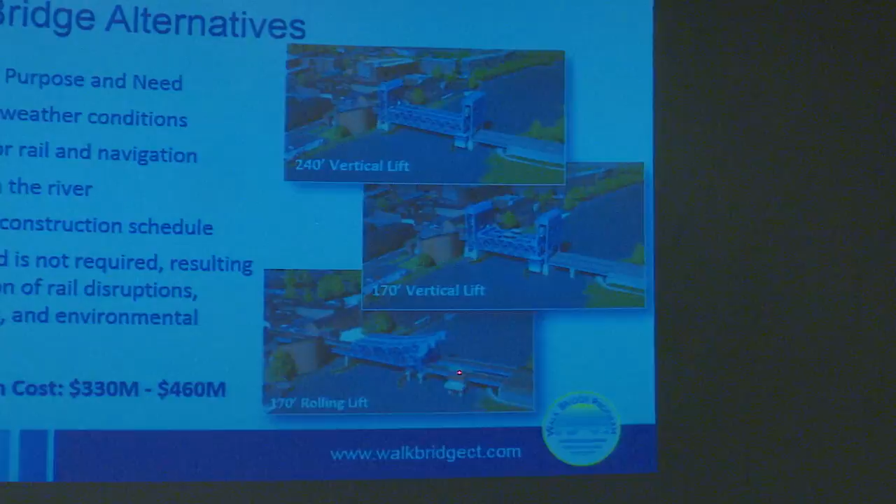What is the difference in depth between the east and west channel as it is now? Yeah, so our bathymetry, which is basically a sonar survey of the underbottom, shows that at the bridge itself on the west side, it's upwards of 18 feet, maybe 20 feet in some spots. As you work your way east, that depth gets to 10 feet, 8 feet, and as you get even closer to the east, you're into the tidal influence, and it's whatever the tide is.

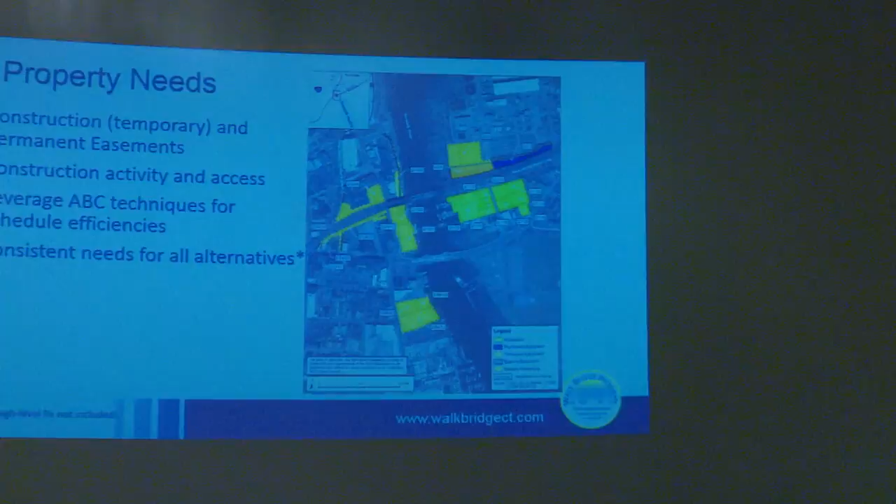Yeah, so one of the accelerated bridge techniques we're going to implement on the project, and really in any of the alternatives, is that we're going to pre-assemble elements of the bridge and have them ready to be installed. But the primary factor for the preferred alternative is that the foundation width is such that we're far enough away from the operating railroad, because we have these towers that straddle the existing bridge, that we don't need the runaround to build those foundations or to erect the tower.

Meanwhile, off-site but close by, the new span is fully assembled. So when it comes time to install it, it's sitting there ready to go and able to set into place.

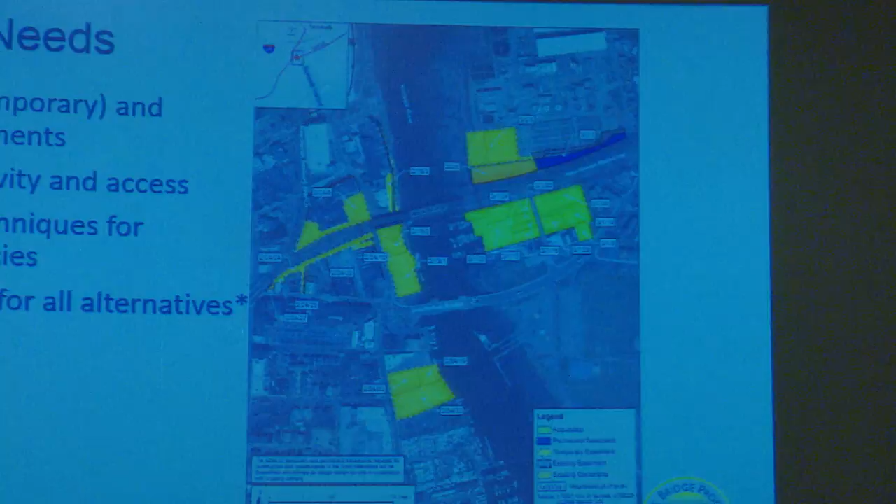So the runaround - I got all these slides, sorry - if you go back to the runaround, again, the runaround focuses on the work over the waterway, right? So over the waterway, we're building a new foundation way out here, and we're building a foundation way out here, far away from the operating tracks.

So we don't need the runaround. It doesn't do us any good because we can keep trains moving while we're doing construction activity underneath on the foundations, and then as we're building the lift span towers, we're also far away from the tracks. So the runaround itself, for all intents and purposes, ends right here. But the lift span is out here, so we don't need it.

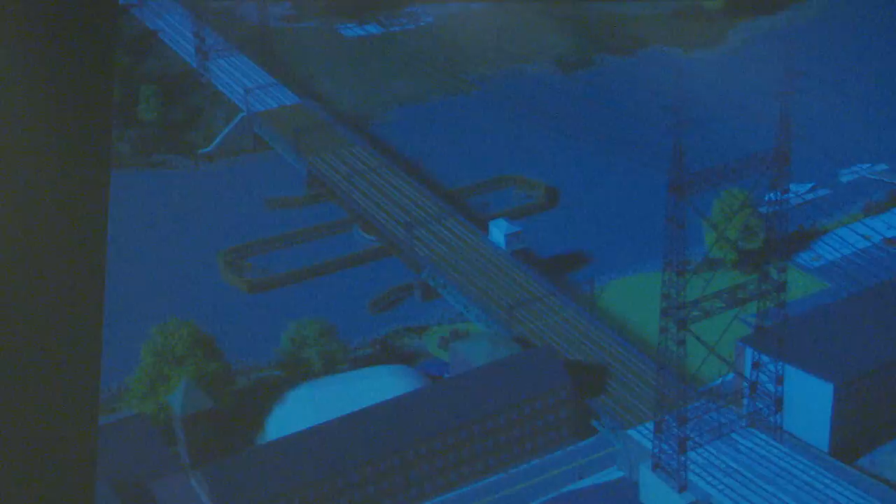But on the smaller bridges, where we have more reasonably sized foundations for its structure type, we're building real close to the existing structure. And so the runaround itself - because we don't want to be building piers right here and right here while we're still trying to operate the trains, that imposes a huge construction risk. The existing piers could be susceptible to settlement or other factors while those foundations are being built. So the runaround gets you away from the existing bridge, but we're already away from the existing bridge with the preferred alternative.

How long will the railroad be out of operation while you're removing the old bridge and sliding the new bridge into place? How long will the railroad be out of operation while the existing bridge is removed and the new bridge is installed?

That is a question that hasn't been answered yet. There are a couple of concepts under development that need a lot of coordination with Metro North in order to get their approval of a construction scheme. So one thing we didn't mention today is that the project is being delivered via the CMGC method - Construction Manager General Contractor. There's a contractor that's part of the team right now that has a lot of experience building these types of bridges, so we collaborate with them on a daily basis.

As the commissioner mentioned, we have an office in Norwalk. We have a design office in New Haven. Our design team and the contractor are there daily, and we work out all these constructability issues together from a design perspective and from a construction perspective. Metro North is in our office maybe 2 to 3 times a week to talk about these things also.

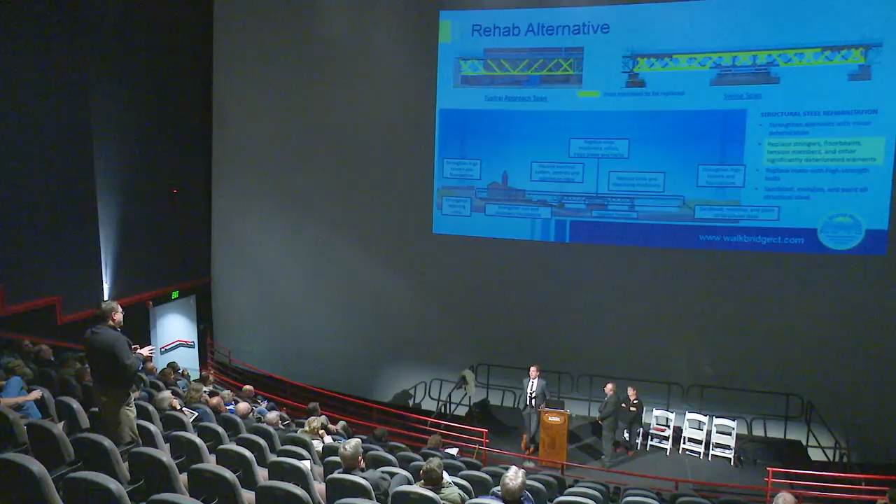That wasn't my question, but what I'm trying to get to, your answer - you're jumping to the conclusion that the river has to be maintained as navigable. No, let's take that off the table. Let's say we threw all the regulatory requirements, the upstream users, and the potential development off the table, and let's just look at the bridge. So we have, again, the number of trains a day seems to fluctuate, and I keep using 150 trains a day, right? So there's 150 trains a day that go across the Norwalk River. Those 125,000 passengers a day have to get somewhere, right? So they need a bridge, right?

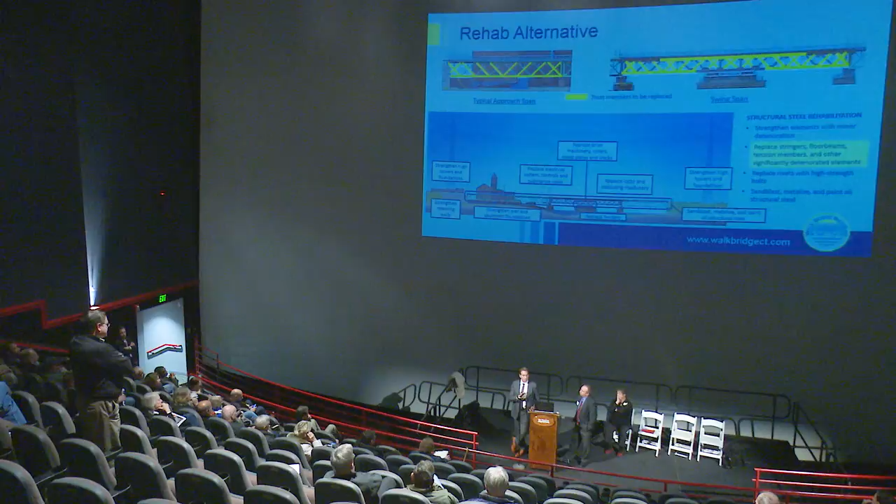So we have a bridge that's 120 years old, and it does, by happenstance, operate and accommodate navigation. If you just look at the bridge itself, the structure, the fact that it's been out there for 120 years - we're literally in uncharted waters for a bridge that old seeing that much volume of traffic. So when you look at this image, if you were to take away the navigability of the waterway, you would still have to have a bridge. You would agree with that, right? I want that bridge to be safe.

You're absolutely right. Yep. So because of that, if you wanted to go with the rehabilitation option, you could do that - and again, I'm saying this on the premise that we're discounting the regulatory stuff. So you could repair the bridge. Repairing the bridge and taking a look at the number of elements currently insufficient by today's standards is voluminous. If you look at this image, the yellow highlighted members of one plane of the truss indicate those members that have to have significant strengthening or even replacement. So what we've done is quantify what those needs are - we know a particular member needs something done to it, so there's a particular level of effort required to make that improvement. So whether you have a waterway or not, you still have to do something to the bridge.

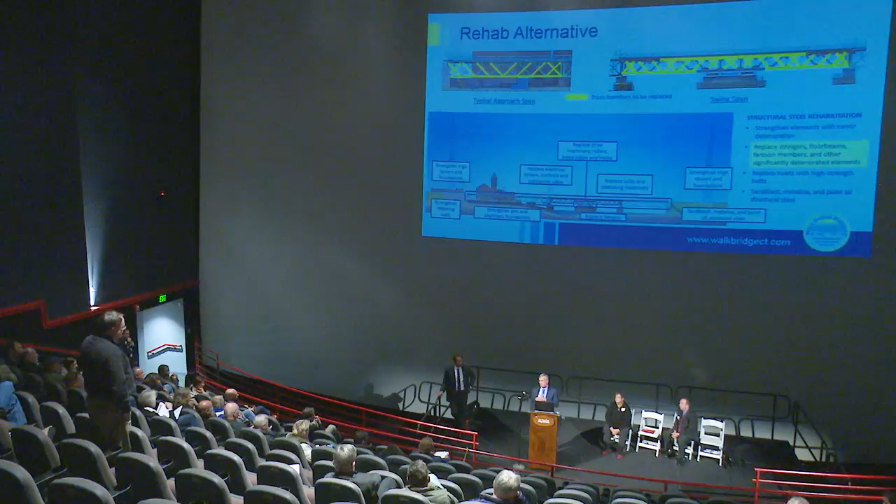So it's still wasting money. Well, it's still money being wasted on something that doesn't need to be done the way you're moving forward, I think. I beg to differ, and that's why we're going through the alternatives.

If you add the full cost to the owners of the property that will lose their business because you won't be able to navigate—how many properties are there? Not only that, but how about the value of the properties up and down the river afterwards, and the tax? We're not prepared to comment on that tonight in terms of a quantification, but that's a real cost. A navigable waterway does not have that impact—it maintains, sustains, and enhances the operation.

Yes. Here? Yeah. Hi, thanks.

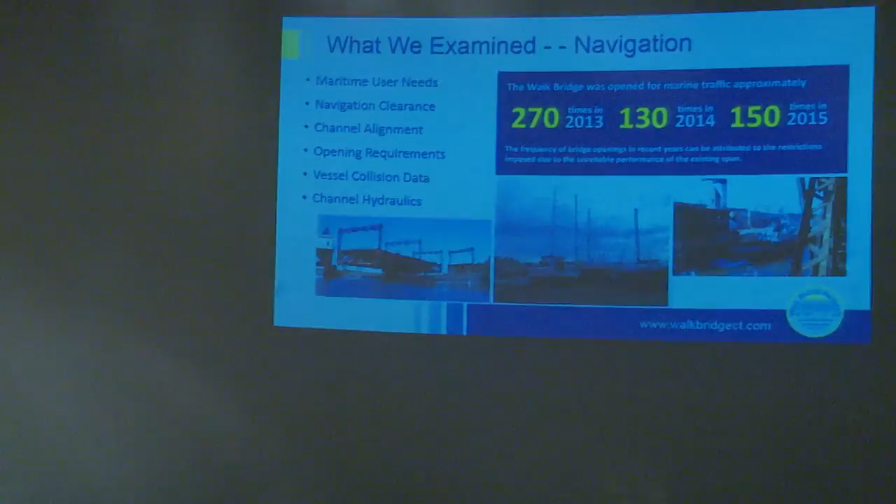This was the slide you referred to. One thing to keep in mind is that in 2014, that's when the well-publicized issues with the bridge started—the bridge was not as free to open and close as it once was, because of the restrictions placed on it by the Coast Guard. So a lot of times when there was a bridge opening, multiple vessels would pass through because they knew when that opening was and could capitalize on it. The numbers in this 3-year trend have gone down because of that restriction.

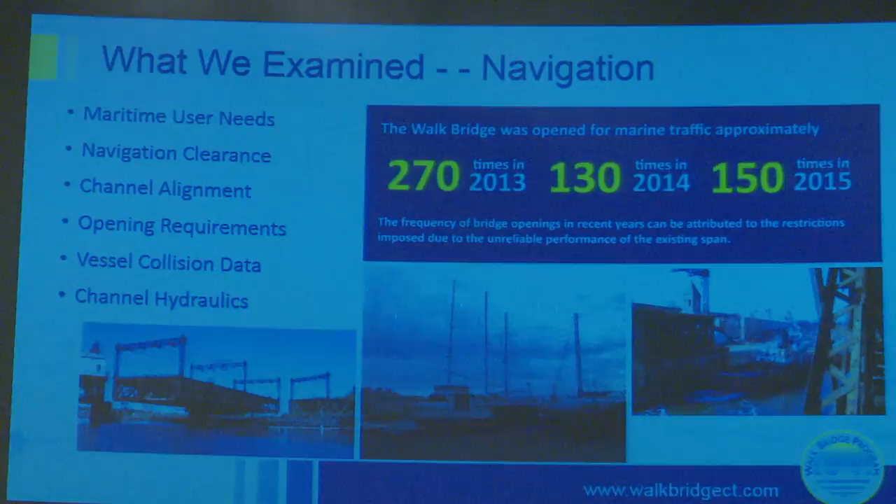So it's not a real reflection of the number of vessels that go through—users accommodated that. Are you saying that companies went out of business, and that's why? No, I'm not saying that. So they've accommodated the fact that rather than one boat equaling one opening, it may be 2 boats equaling one opening. That type of thing—it would be more of an adjustment in the schedule.

So just back to my other question for a minute—150, do you know the mix between commercial and recreational? Yeah, I can give you a snapshot here, just of one year. That was on the mid-level lift, right?

So just as a note, in the mind of the Coast Guard, they view recreation as commercial because you had to buy a boat, you have to buy gas, you're going somewhere to buy something. So whether it's commercial in terms of shipping a commodity, or whether you have a sailboat you like to go out on the Long Island Sound in, the Coast Guard views that as commercial, and that's in their documents. I'd be happy to share that with you.

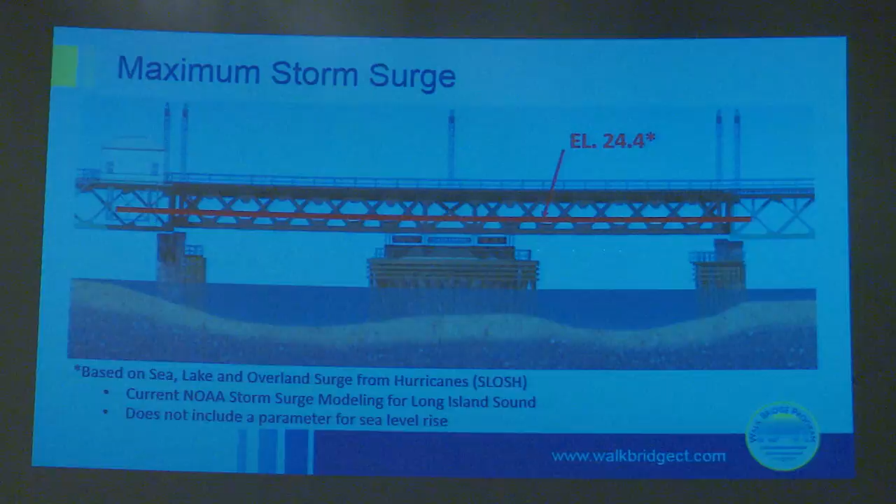So the designation of somebody with a sailboat versus somebody with a tug and a barge, in the Coast Guard's eyes, they don't care, because it's all how these Coast Guard rules started was for commerce, right? The preservation of commerce, because the water was there first. Then all of a sudden we started to have trains, and then cars, and people wanted to get across the water. But the Coast Guard and the Army Corps at the time, back in the Rivers and Harbors Act of 1899, said, well, we want to make sure we can still keep the waterways going, but we still want to keep the surface transportation going too. So in their mind, whether you have a sailboat or a barge, it's all commercial and it's all commerce related.

So let me get to your question. I just think the fact that you don't have that definition—I understand there's no definition of the reasonable—but I would say that 80%, or 90%, of the pleasure boats that are going through are going to a marina that has, it's a boatyard, and it's a commercial facility.

So the other part of my question has to do with the cost that I don't think you've addressed. So if you have the bridge going up and down to accommodate whatever level that is, 150 times, and I think some of that might be seasonal as well. So we're looking at, right, there's some seasonal use, so it's actually compressed. So we're talking about stakeholders: 175 trains a day and 125,000 passengers, versus this compressed seasonal time of year and very limited scope of stakeholders. But I want to understand what the costs are associated with having the moving bridge going forward. There must be some person responsible for raising the lift, and then there's also ongoing maintenance costs. Are those completely nominal, or what are the costs of that annually?

I thought I had a picture I may have glossed over earlier, of Amtrak's Thames River Bridge being erected by the same contractor, designed by basically the same designer. There's a couple shots here, two different ones - one's a bascule sitting on a barge, and that's a lift span sitting on a barge and floated into position. So you just can't lift that span, particularly on the Norwalk River - it's just not big enough to accommodate a crane that size.